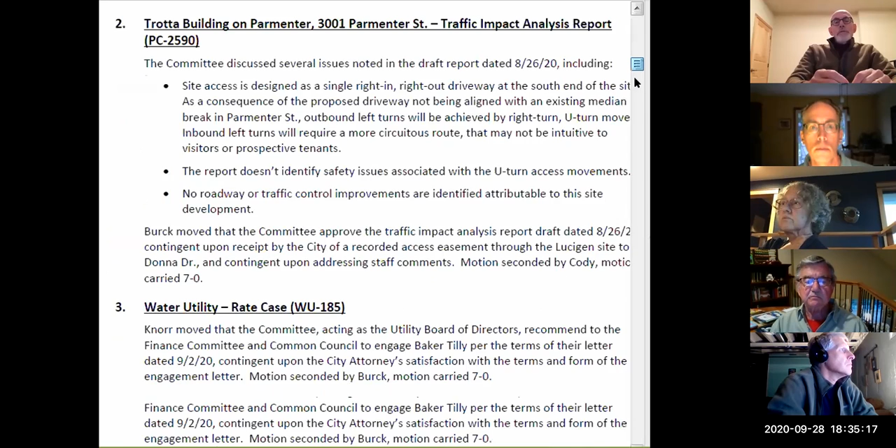Did you want to go to the memo? It might not be a bad idea to look at those options if the committee wants to do that. Another reason that was mentioned was the fact that he's going to have heavy traffic on that road, and if we did it as originally scheduled, it would be damaged, and he threatened not to pay for the damage. Oh, I think that's a fair point. Yeah, I remember that. And that's going to be stronger than all of his other concerns, and that's going to be done in spring, regardless of whether we defer the project another year or not.

My first thought is this comes- oh, go ahead, Don. Do we have confirmation from T-Wall on that? We have heard that, and I think the contractor's also on the line. Trevor Caulfield and Keith are both on the line involved in that project, but the last I heard was that it should be finishing up in spring.

Sean, this is Keith from Stevens. Can you hear me? Yep. Yeah, that is correct. We'll be done sometime in May with Phase 3 of Middleton Center. All right, yeah, it will be complete in May.

That is correct. Ready for people to move in. Correct, okay.

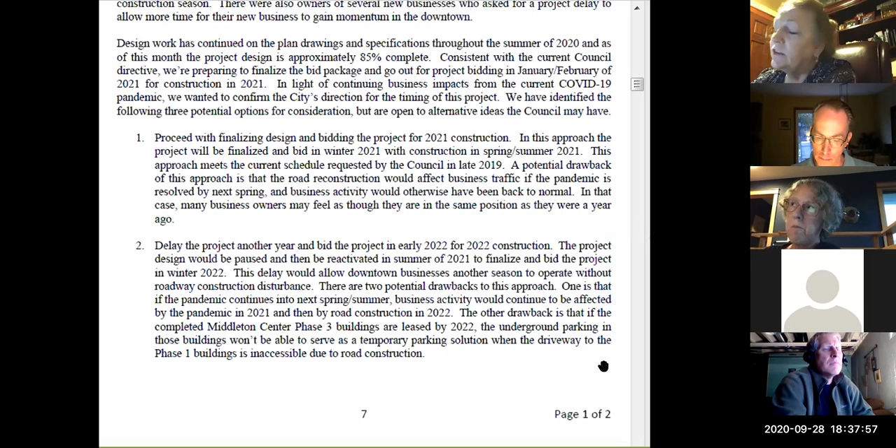Sean and Bob, this is Kathy Olson. I reached out to the Downtown Middleton Business Association and they polled their membership. I talked to the president, Andrew Van Ness, this afternoon. And if possible, they would like to see option number 3. Just plan on going forward with it for next year, but it would be nice to have that little extra check-in. They are in favor of having it completed next year if you could do it earlier in the springtime too.

Okay, good to know, thanks. That little extra check-in wouldn't be the worst thing for them, because I said something about checking back in December or early January just to see where the pandemic is.

As I read it, we don't have to make the decision today. It looks like it could be deferred till December. So what is the harm in just waiting to make the decision, choosing option 3?

Option 3 is essentially a springboard from option 1. Option 1 is let's finish the design and get the thing bid and then build it. Option 3 is almost the same thing, but before putting it out for bid, let's check back in.

Does it disrupt things much, Sean, if you wait a couple months before you've got the final plans, final process in place to do the bidding?

I think we would be wise to actually get ourselves ready to bid it, so that we would want to start back up now and get it ready to go, so that when a decision is made, we can actually get it out to bid.

Sean, as the non-engineer on this committee, but a microbiologist, I would recommend option 3, and even with that, a lot more flexibility. I think it's very optimistic to think that the pandemic will be over even next fall, probably.

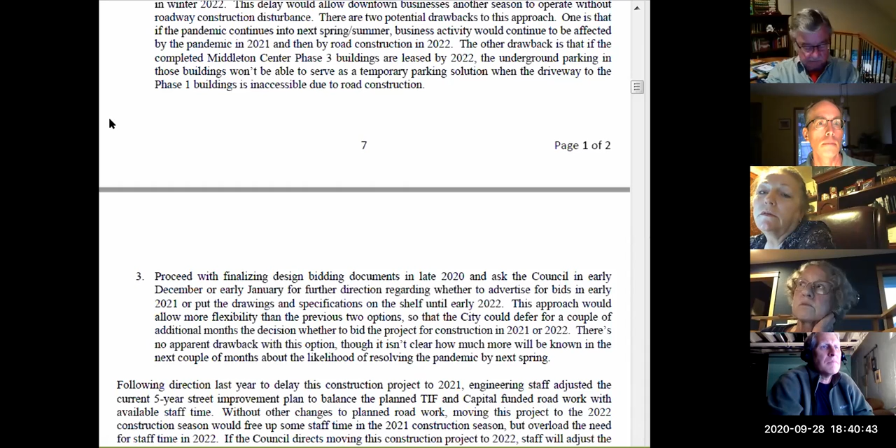I just want to make it clear, wishful thinking that the pandemic's going to be over soon is probably wishful thinking. This is Kathy. They said in 2022, if the pandemic's over, they don't want to have everything torn up. They'd like to get rolling and not have another disruption.

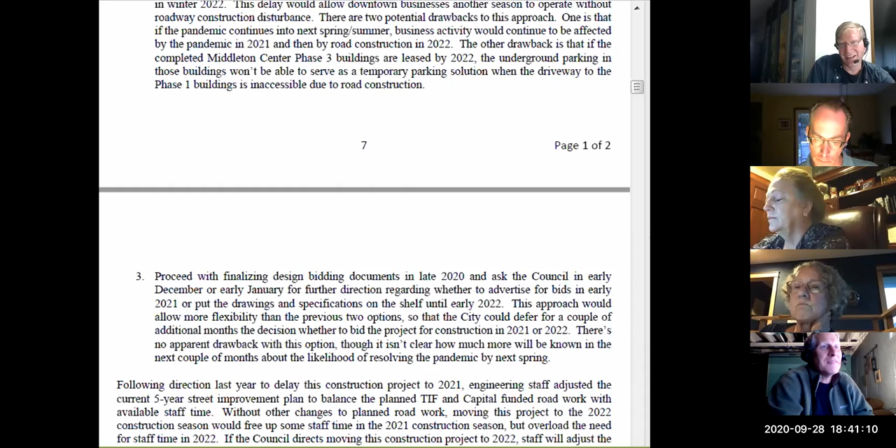So it sounds like we have some type of motion here, which it sounds like everybody likes 1 or 3, and 3 is the same as 1, only with a little bit of leeway.

Added leeway. Yes. So I would make the motion to propose that we approve proposal number 3.

Okay. I'll second that. Who seconded it, Dan? Dan, yes. We have a motion and a second then.

Is there any further discussion on this issue? I just had one question.

Has the pandemic, do we foresee that there'll be a surge of construction demand, or is there a shortage of manpower or anything like that that might affect this when we try to go forward with it? Or is stuff kind of rolling along?

I don't know enough about how that may affect us coming out of winter, because it depends a lot how winter ends up shaping up illness-wise.

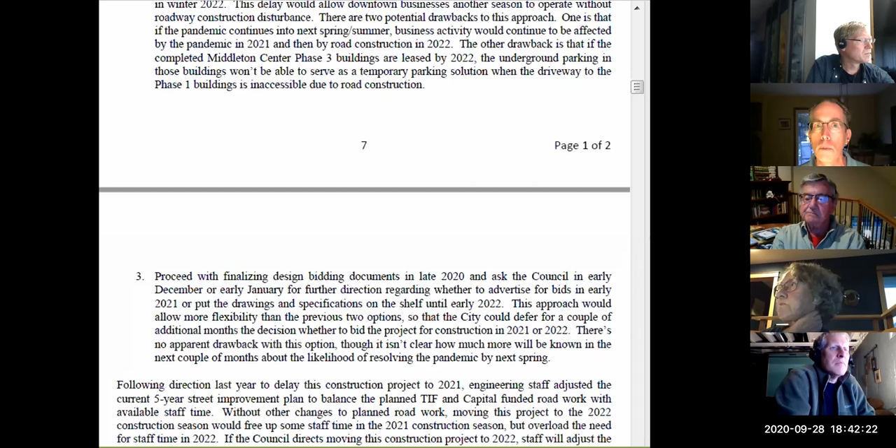I can say this year, when almost everything was shut down, the road contractors were looking for early work. They wanted to get back at it. And we got a lot done early this year.

Further discussion or questions?

Hearing none, all those in favor of the motion signify by saying aye. Aye. Opposed, nay. The ayes have it, and the motion is carried.

And then this, Sean, is what will be recommended to the council. Before we get off this subject, can we ask Tom if he has any issues with getting this done this fall?

Sure thing, Don. Tom Stetzer here from Strand Associates, the project manager on the project, and no issues from my end. I think we were ramping up design here this fall, and we're at about the 85% level, I would say, plus or minus.

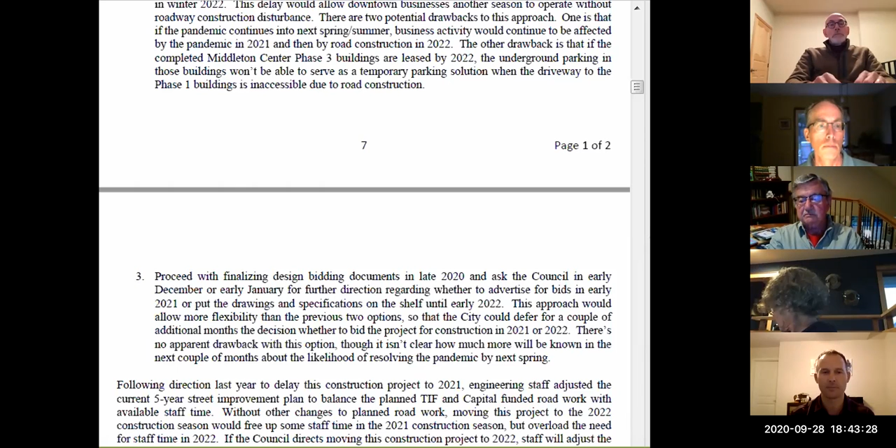We just wanted a little bit of clarity on whether we should keep charging ahead and get this thing buttoned up and ready for bidding, or if the committee and council felt strongly that it needed to be delayed for a specific reason. Then from an efficiency standpoint, we were just going to shut down the project and close our internal project numbers, for example. But no, this plan sounds great to me. Okay.

Next item. Well, that sounds good. Thanks, Tom, and Sean Elzard, if you're still with us, have a good night. Thank you, gentlemen.

So next on our agenda is Middleton Center Phase 3, request to abandon some steel piles in the right-of-way. We had a lot in our packets in terms of design drawings and actual survey follow-up. Let me just zoom that down a little bit.

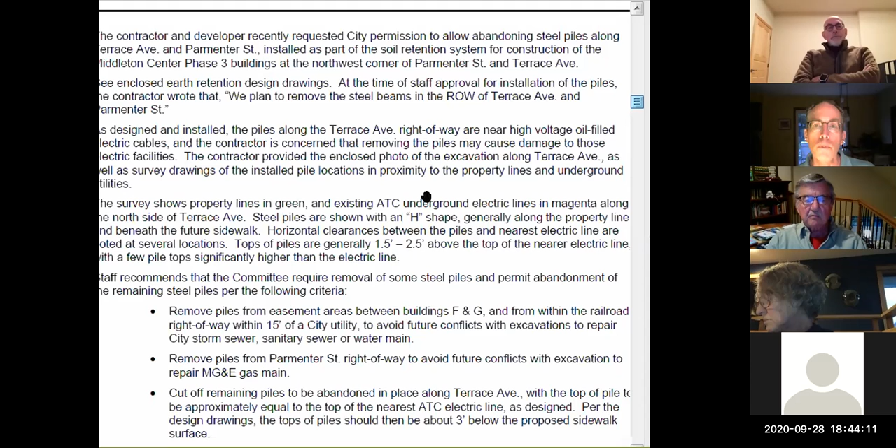The earth retention at Middleton Center Phase 3 was designed, at least along the road rights of way, as soldier piles. So these H-shaped piles were driven vertically into the ground, and then boards are put between them, if that makes sense to everybody. They were installed relatively near the property lines.

Unfortunately, that's also fairly near where there's a significant ATC underground transmission line. I think those are 69 kilovolt lines that are oil-filled pipes, essentially, that carry that electricity along Terrace Avenue. And then along Parmenter Street, there's a gas main.

And so the request was to just allow those piles, the steel vertical piles, to be abandoned in place. I think especially near the 69 kV line, I'm sympathetic to a change in plans. Ordinarily, we wouldn't allow such things to be abandoned in place. And here I think there's the potential to cause more damage from a small mistake than there is to just leave it where it is and put a sidewalk on top of it and let it be.

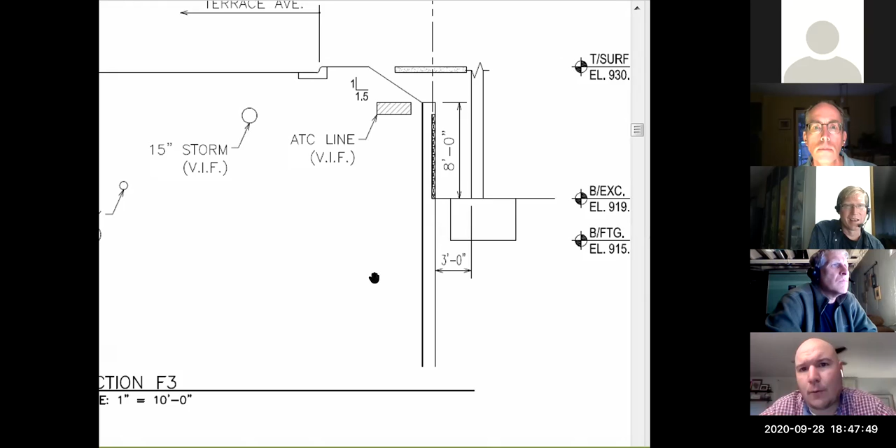Sean, this is Robert. Can we look at some of the drawings? Because I looked at them and I wasn't sure I was understanding which. I was actually surprised that they ever take these things out. But when you explain how they get in the way of other underground items, I'm hesitant to allow these things to stay in place in every location. I do want to help, and I do want to understand it better so that I can make a good decision.

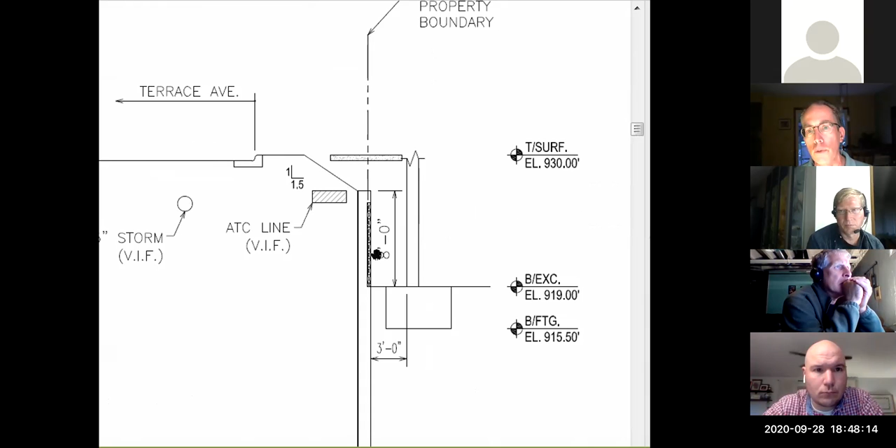Sure, so I'm going to start with a cross-section drawing. If we take a knife and cut a line through the earth and take a look at it sideways - so when you look at a piece of road, curb and gutter, slope - this is the steel pile that's driven vertically down into the earth. It supports this road from falling into the hole that's being dug for the foundation. So they're pouring a foundation and a wall for the underground parking, and up here is a sidewalk.

Again, when we're looking at it sideways, the ATC lines really are roughly here below the sidewalk edge towards the street side. And then we've got these steel piles driven every 15 feet or so, more or less along the property line.

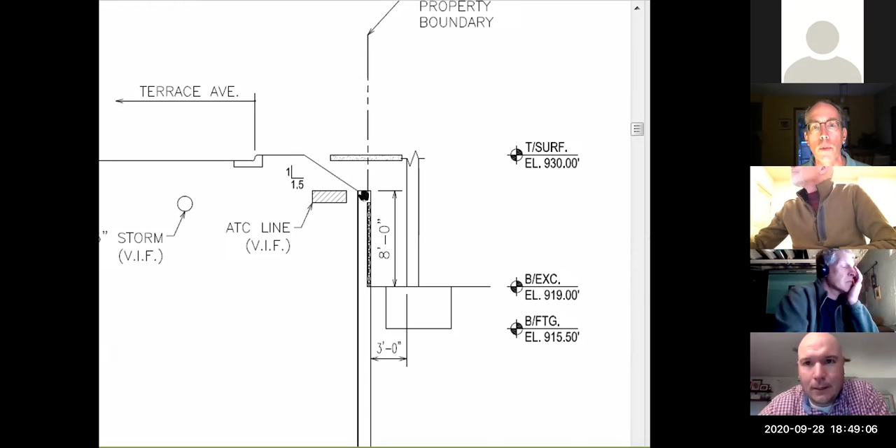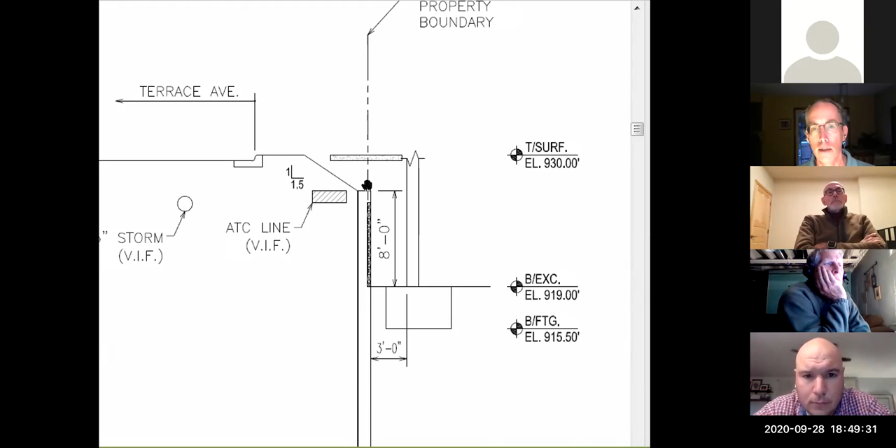So the question is, trying to get these steel piles pulled back out of the earth without wrecking this ATC line is a challenge, I'll say it that way. And so the proposal was, could we just leave these things here? Some of them are a little bit further up than they're shown in this design drawing relative to the ATC line. But even if they were cut off here, they'd be about 3 feet below the sidewalk, if that makes sense.

Sean, could I jump in for a minute or two here? This is a good time.

Typically in other municipalities, they'll allow us to leave these in place. With the proximity of the ATC lines and the gas lines, it's not ideal to even attempt to pull these out. These piles are 40 feet in length, and if we had to pull them out, it's going to create some settlements around adjacent underground utilities, with potential to create significant issues with the ATC lines and the gas line. So what we'd be proposing is to cut these things off below grade, between 3 and 4 feet below grade, and leave them in place. It's typical for what Madison or Milwaukee would allow us to do.

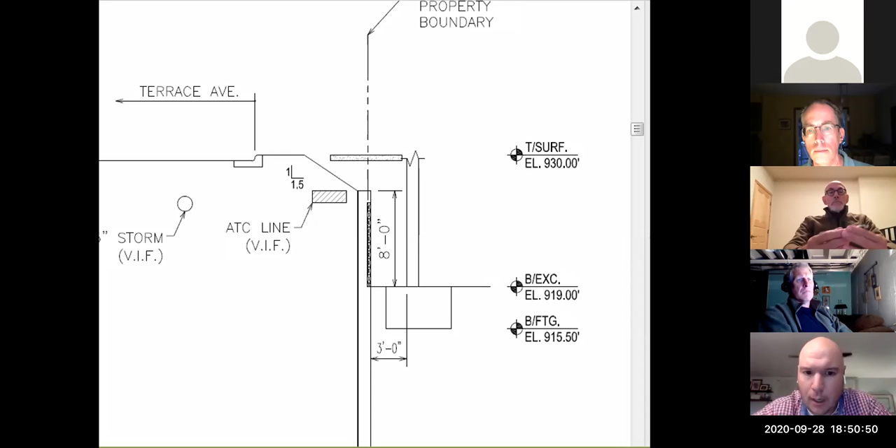I've had some experiences pulling smaller piles out, and it's created some settlement issues that would raise some concerns. This is a perfect picture to look at this cross section. You can imagine we're holding back the earth between the piling and the street. If we try to pull that out, the material between the back of the curb and the piling's got to go somewhere, and it's going to collapse. It's going to move, and it could create issues that would not be ideal. So our lobby is whether we're able to cut these things off and leave them in place.

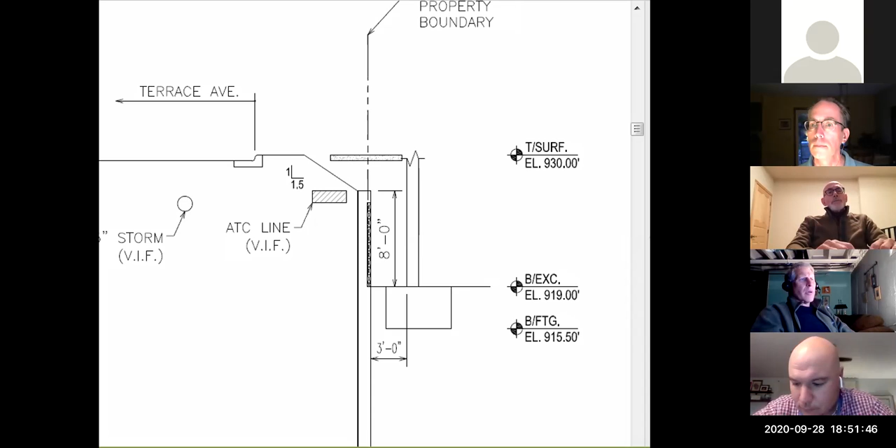Can I ask you a question, Keith? I thought I read somewhere in the paperwork that the original agreement when you put them in was that they were going to be taken out. So how did that take place? Does anybody recall where that text was? It might have been in a summary. Let me look for that. I think it was an email.

I don't know, this is Trevor. Okay, can you guys hear me? This is Trevor Poffeld from Terra.

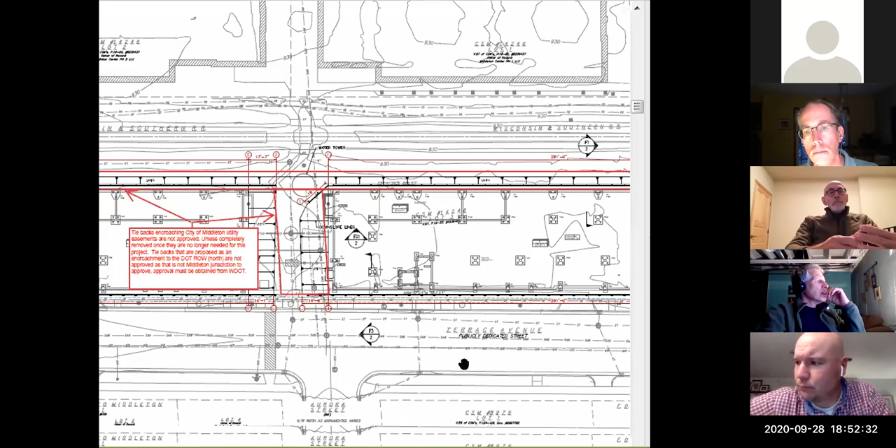I kind of got brought in midway through this project as we were installing the earth retention. My understanding is that the issue was the ATC line was not installed where it was shown per plan. It's actually closer to the job site, to our earth retention wall, than shown on drawings. It was supposed to be closer towards the roadside, and it's actually more towards the building side. So the issue is, that ATC line is over, probably about 18 inches or so, Keith, I can't remember the exact number, closer to our wall, which made it, in some areas, less than 12 inches away from our proposed earth retention. That's the real issue, this ATC line ended up being a lot closer to the proposed property line than originally anticipated during the original design.

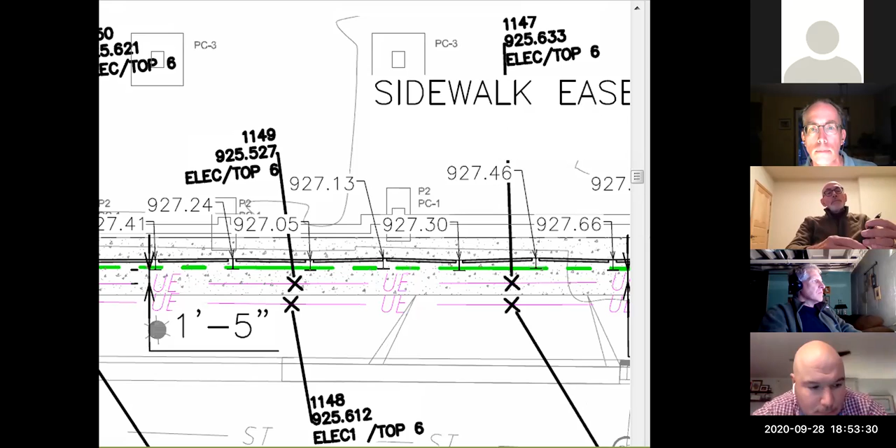Can I ask how you remove the timbers without having a settlement problem? So the timbers stay in place. That's standard, it's just standard oak boards. Those rot over time. The issue isn't the lagging getting removed, the issue is the beams themselves.

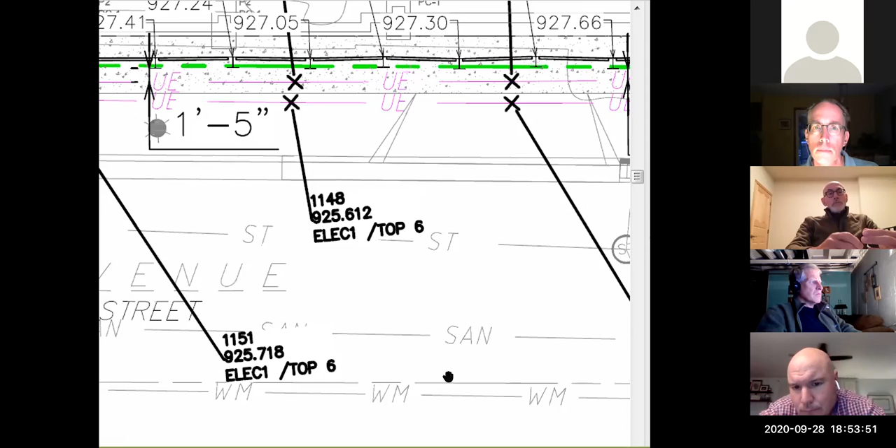If you picture a 14-inch beam, as you're pulling it out of the ground, you're essentially creating a void, a space where that beam was. As you vibrate that beam, you're consolidating or compacting that material to fill that void. That's where you get the pretty high risk in this instance of settlement of that ATC line and gas line in that area. Oh, I know how that's done. I was just curious, you're not removing the timbers then, is that correct?

The timbers would be removed within that top 3 to 4 feet, where the soldier piles would be left in place. Otherwise, they get left in place. That's pretty standard, industry standard for this.

Oh, okay, I had not been told that either. And I see I didn't include in the packets the actual email from Terra Construction that this would all be removed. I think I just included a note about that email in my memo.

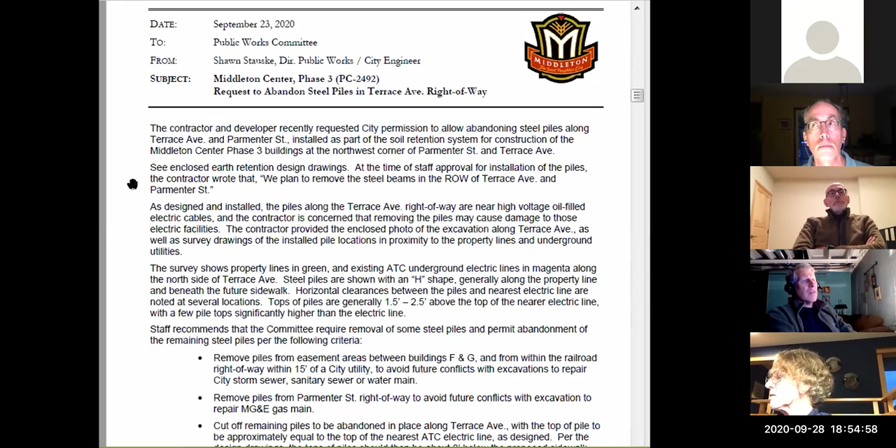I need to explain how you could promise it and then retract from that. I understand if something changed location, that might make sense for some of the piles. I think the impetus for all this is the ATC line runs parallel for the full length of the project for buildings F and G, and it's closer to than anticipated, from when it was originally thought it was going to be.

Yeah, and I guess just another highlight point - Trevor and I kind of came in after the original agreement, after T-Wall got the original approval. I guess we weren't necessarily really that involved with the earlier approval.

And the only other thing to bring up on Terra's end, the equipment used to install the beams is a state-of-the-art high frequency, low amplitude vibratory hammer to negate or minimize vibrations into the ground or adjacent properties, or disturbance of neighbors.

And from previous phases out there, we had used another hammer that I've heard neighbors had complained about the noise and vibrations from. I don't believe we've had that with this phase, but the issue is that in order to use that high-tech equipment, you need to be right up on that beam within the excavation.

The fact is, we literally can't reach the beams from the road with this equipment. We'd have to go back to using the more lower frequency, higher amplitude vibratory hammer, which may be a little bit of annoyance to neighbors or adjacent property owners.

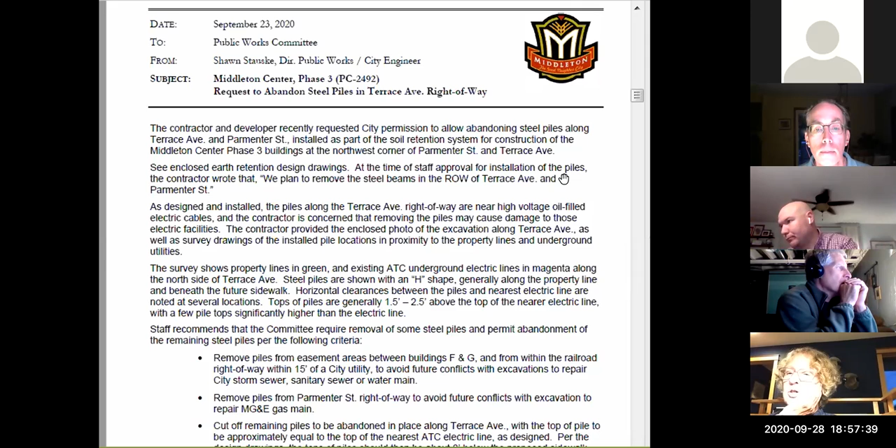Shawn, did we have this problem on phase one? I believe that was - they all put the piles and timbers in. I think that was all removed.

What does ATC say? Anything? I haven't heard from them. Did Trevor or Keith, you contact ATC?

Yeah, we've been dealing with them all along. We had their watchdog out there basically full time while we were putting these in. Brian Schilling is the contact over there. I'm sure I can loop him and Shawn in, unless you know Brian - I can start a conversation with him if needed.

I don't. I just know that I had asked for a survey and a memo, and I got a really good survey.

And what about MG&E? Have we talked to them? Do they have an opinion? I have not heard from them. I was expecting that if we were pulling this steel away from their gas line, that's a longer, more robust facility that they can hold a little bit at a time if they need to. So I haven't heard from them, no.

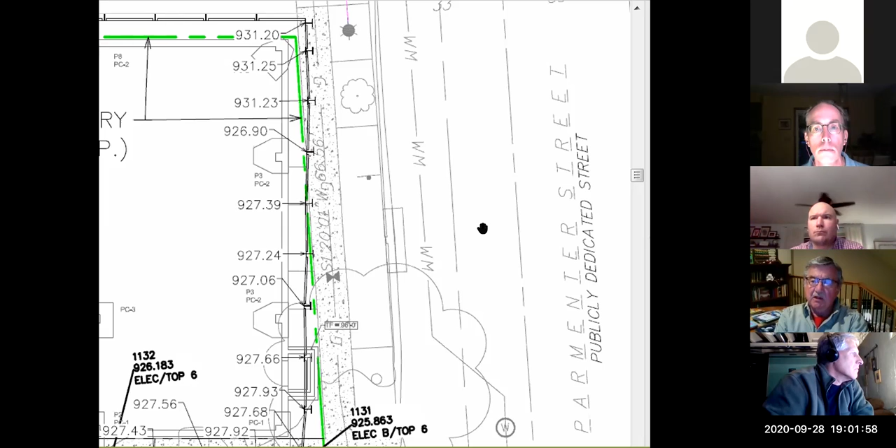Shawn, the sentence from the email you had on screen a short time ago that in effect promised to pull these out when they were finished - was that from T-Wall? No, that was from Terra, the subcontractor that does the earth retention. So Terra's not asking to leave them in place - it's T-Wall that's asking to leave them in place. Well, it's really a combination of all parties: Terra, Stevens, and T-Wall.

So, this is Robert - help me understand. It sounds like they're planning, even if they leave some or all of these in place, to go down about 4 feet to cut them off and remove the boards down to the wood oak boards at that 4 foot depth. Anything below 4 feet is where the piling and the oak would be.

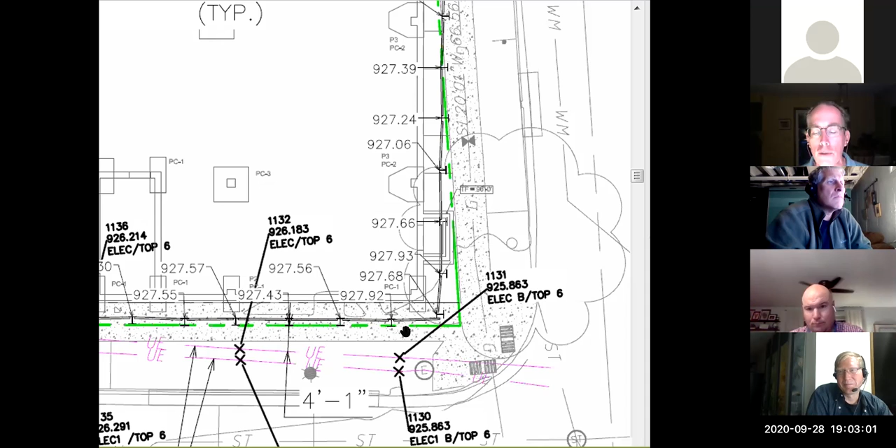So for people running fiber optic cable, for people dealing with gas utilities, how deep do they go? Well, that varies. I think most of those - telephone, gas and electric - are generally in the upper 3 feet-ish, I'd say. When we get into water and sewer, that's when we're 6, 7 feet down, sometimes deeper.

So it seems more likely that when we have to bring in a new sewer service along from the road through this wall and into the building, it has to go through the oak boards, down to as deep as that sewer is going to be - ideally without hitting any steel.

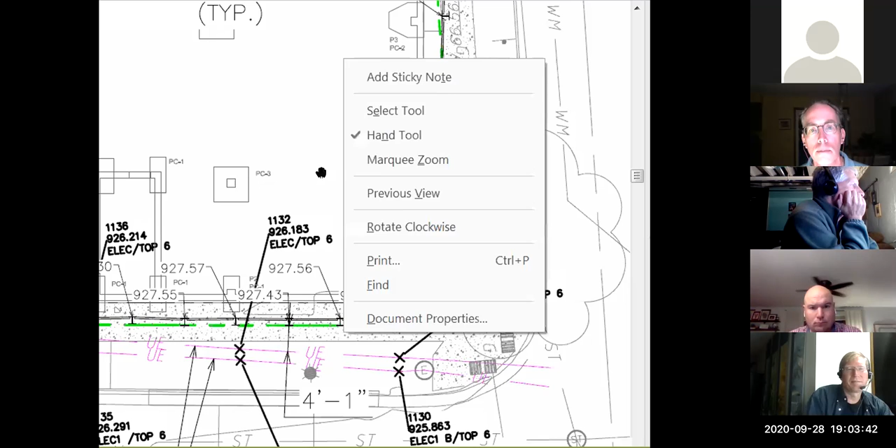And just to jump in again - it is industry standard in local municipalities that this material does get left in place, and generally the top 4 feet gets removed. We do this all over the state - in Minnesota, in Illinois. We're not asking for anything that's not common. Just for reference, we can look up other projects in other construction municipalities where we've done that.

That helps you. The oak boards are easily drilled through by contractors. The steel beams are easily cut off if they're exposed and need to be removed. So just to give a little frame of reference, it's not uncommon that these are left in place - actually more common, just because it's such a difficulty to come back and remove everything without settling stuff around you once everything's built around it.

And I think that's a fair point - thanks for adding that, Trevor, that it's not insurmountable. If somebody has to go through this wall or through this steel, it can be done. They might not be set up to do it at the time they want to bring something in, so they may just have to spend some time getting a torch to cut off the steel they didn't bring with them because they didn't know what was there.

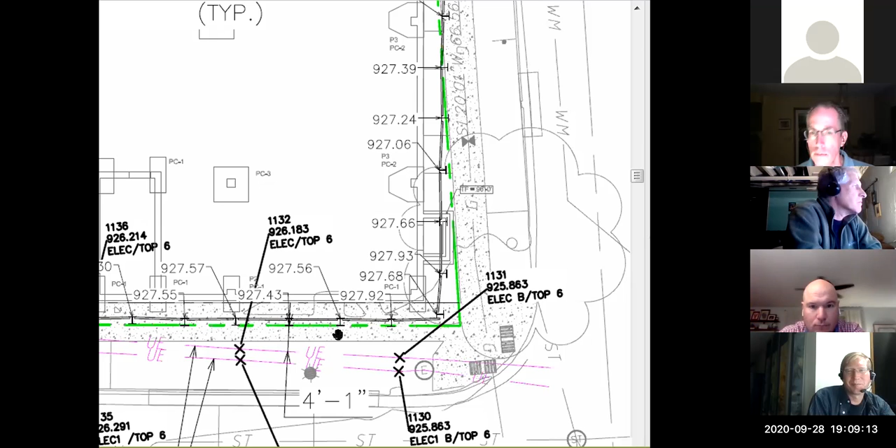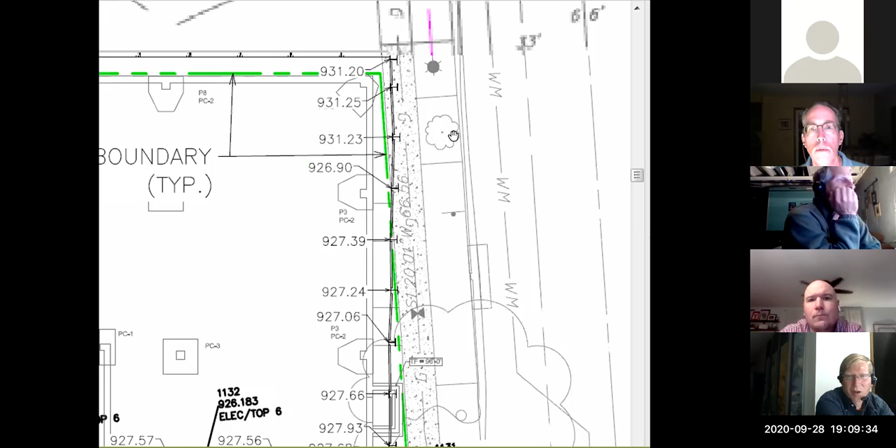So how many are there along Parmenter? Because I feel like this is what we were told as a city that would happen. So this green line is the property line. So all of these little I-beam shaped things are pretty much on private property, and then they start getting out into the right of way. So we only care about the ones in the public right of way.

Because we're no longer liable once it's onto private property, that's not our concern. As you look at that drawing, I just want to point out how close they are encroaching upon that gas line that's there. And again, it's not the same type of equipment, unfortunately, pulling them out that it was putting them in.

So it's a good conversation for you to have with the gas company. I don't know if they can hold or relocate or what they have to do to stabilize that. In the big picture, while you're used to putting these things in and leaving them there, we were told you were going to put them in and take them back out.

Yeah, I can't comment on that, Sean. I wasn't involved. I'd have to get Scott Zimmerman involved, and I'm sure he'd be more than happy to look into that and what the context of that statement was originally as well.

I would also be interested in hearing how your discussion goes on Wednesday, was it? Because right now I'm not all that persuaded to leave in the ones on Parmenter that are in the right of way. Maybe I can be swayed with more information, but based on the information I have now, I would rather get those 6 removed.

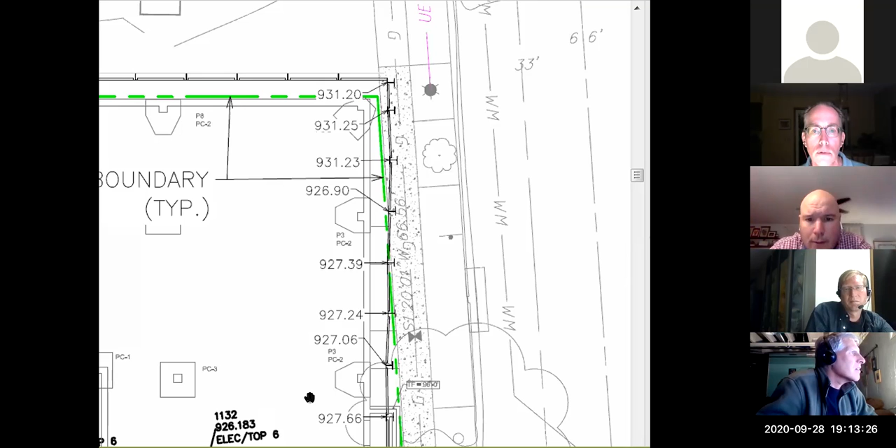I think the green line is the property line. Yeah. That's what we're hearing, right? Oh, so there's some that are, a lot of those are on the edge. Right on the edge. Yeah, they're right on the edge. They're all right on the edge. So some of them just straddle, but it's not a huge thing.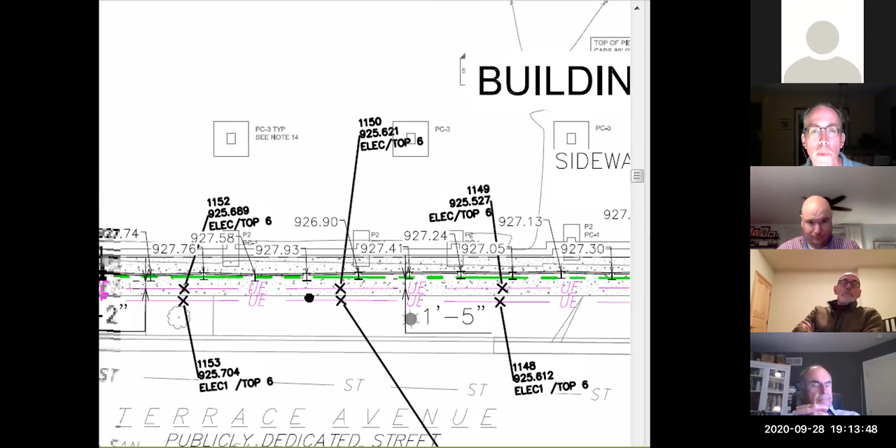I mean, it would be enough that if we could map these and tie it to our record drawings someplace, that we could at least advise a future utility company: don't bother trying to hug the right-of-way line if you're installing something here. Get out into the right-of-way someplace instead, or go on the south terrace, not the north one.

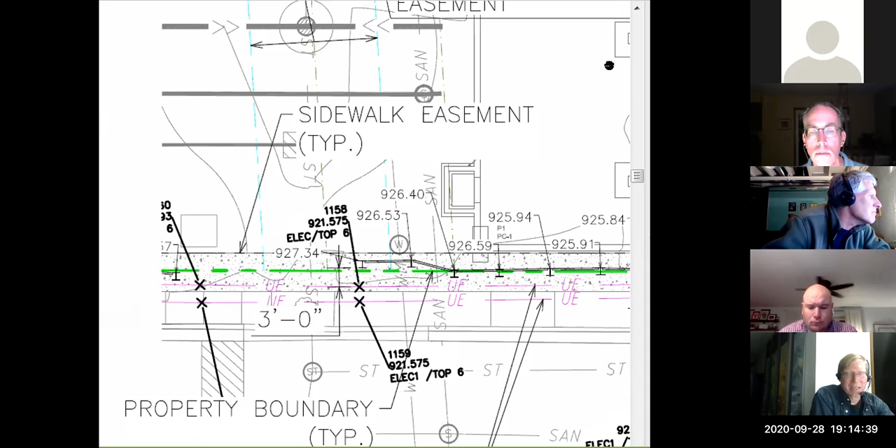I think we're in agreement for the most part. I hear a lot of agreement on what we do on Terrace. I'm just still struggling a little bit with the ones, and I thank you for pointing out that it's not sewer work that's probably going to run into these things. It would be potentially something more like fiber optic, which may be above where they're cut off anyway. If fiber optic is 3 feet down and they cut these things off at 4 feet, maybe this isn't a big issue. But I just feel like I need a little bit more information before we just agree to this.

Sean, what about the issue that you raised with the situation between buildings F and G? Regarding sewer and water? That's almost where I ended up landing here anyway - we've got water and storm sewer and sanitary sewer running between these 2 buildings. So all I'm asking is within those easement areas, within 10 feet of where those pipes are centered, to get those piles out. Because when we dig, we have to dig deep and on really short notice.

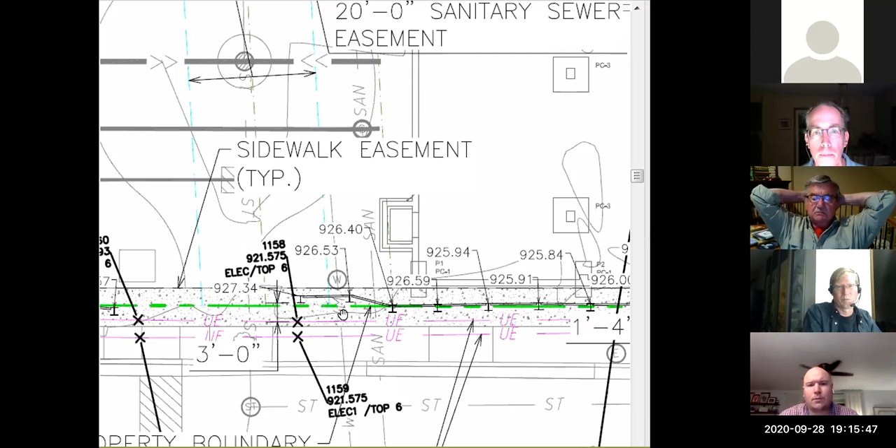Well, and Sean, the other issue right there is that sanitary is probably 40 or 50 years old. Yeah, I think it's clay, correct? We've already had some recent issues with it. I'd be concerned with that specific area as well, pulling those out and creating further issues with that sanitary. And it might already be compromised. And if it has to get rebuilt, now's the better time to do that. When we have a problem, I cannot have a crew and a backhoe looking around for a torch. I can't do that.

How deep is that? Do you know how deep that sanitary is? Not offhand, no.

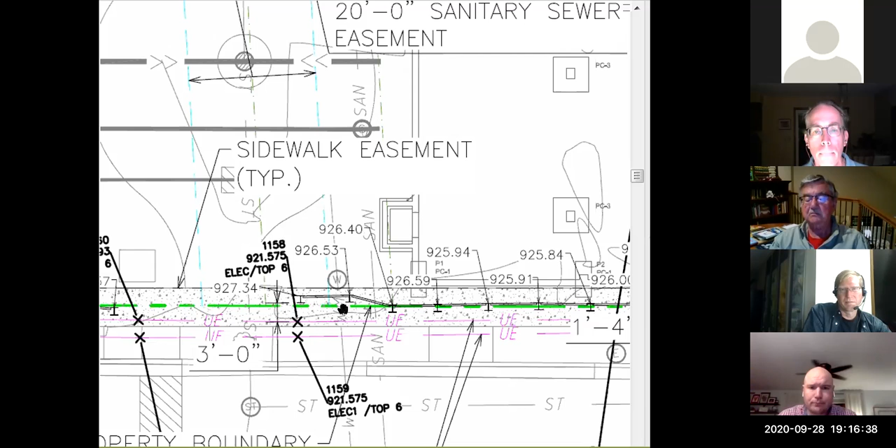So really it's a couple piles on one side and a few on the other. Maybe 4 over here-ish, and then up along the tracks there's a couple more.

I'm getting concerned that we simply need a whole lot more information from multiple different sources before we can make a decision tonight. Not being an engineer, I'm not sure, but I would love to know what MG&E thinks about this whole thing. And MG&E is one input, right? And there's some others too - future utilities may have some concerns, and again, it is city right of way. ATC, I feel like we need more information.

Is there any urgent time element in terms of getting these pilings out or cut off, is there? At this point?

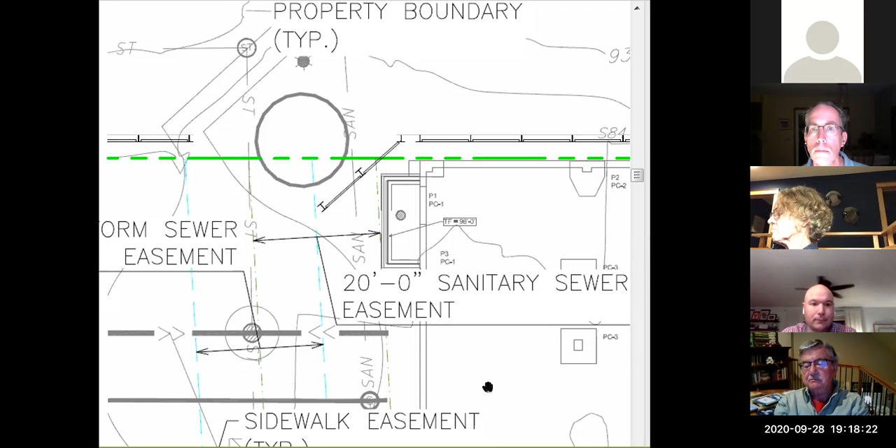We need to backfill along Terrace Avenue. We need to keep backfilling so we can build the building. We have the foundations in on the one building, and we need to get backfilled

out there as soon as possible. Well, I can appreciate that, but you backfill and that takes care of your problem, but then the future problems that are left with all of this are going to be the city's to resolve.

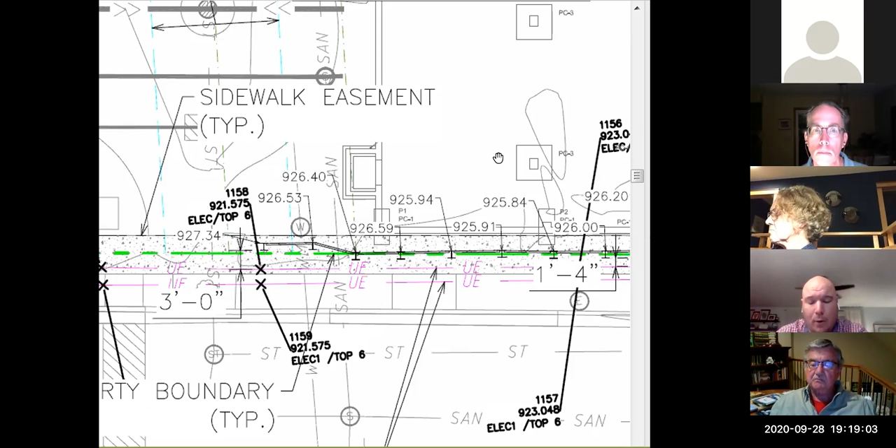Correct. Well, I'm sorry. So the area where we have the piles that are basically from this utility easement down to the corner, I think are all okay. Are we in agreement with that? And then it's really just the Terrace Avenue or the Parmenter Street, and then the ones in the easement that we have to worry about.

Well, I don't know, I thought we wanted to get some more input from ATC to see what they think about this as well, because they have maintenance responsibilities on this stuff also. And

once everything's done and you guys are packed up and gone away, the problems that ensue fall back in the city's lap. Yeah, unless we can put a legal agreement together that assigns the responsibility to the building or the contractor, and then if they want to assign that agreement to the property when the property's sold, they can do that. Personally, I think that's an avenue that we ought to be exploring vigorously.

Yeah, these are going to be there for 100 years or more.

Should we consider, for purposes of keeping construction moving along Terrace Avenue and pushing off to a future agenda reconsideration along Parmenter Street, or at least the northerly ones along Parmenter Street, approving essentially, as had been recommended by me, to allow abandonment at some cutoff elevation for the ones along Terrace Avenue, removal of the ones within the utility easement or zone of influence, and removing the ones along Parmenter Street as the default position, so that in the future, if the committee is convinced to reverse that decision, at least there will be a decision in place in the meantime.

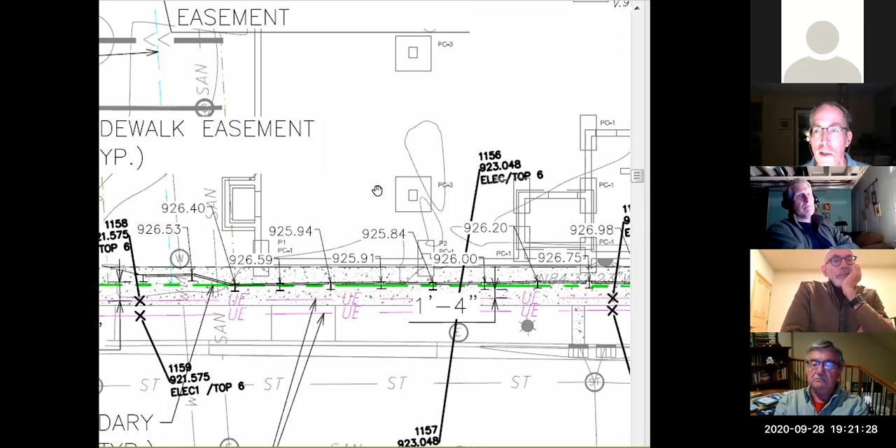Definitely, but one would hope they don't have to dig around all those I-beams to get their trench, but if they're only down 4 or 5 feet, then they're probably okay with what's left. But I agree, on Parmenter Street those should be removed, the ones out in the right of way, because that's the main street in the city essentially, and who knows what's going to go in there in the future in that right of way.

Sean, would you like to add some 2 cents to this discussion? This is Gary. Now is as good a time as any.

One thing you might consider is for any pilings that are allowed to remain, that they be cut off to a deeper level than merely 3 or 4 feet, something between 6 and 8 perhaps. That will keep them well clear of the vast majority of future utility installations. The reason we care about what happens to fiber optic is because if they can't go where they want to, that leaves them moving further out into the right of way, possibly interfering with our facilities.

Just some food for thought. Sure. I had previously picked 10 and that was unsafe, and I don't know if 8 is or 6 is, but it may not be. So OSHA is 48 inches. Yeah, so we wouldn't be able to do anything deeper than that. Okay.

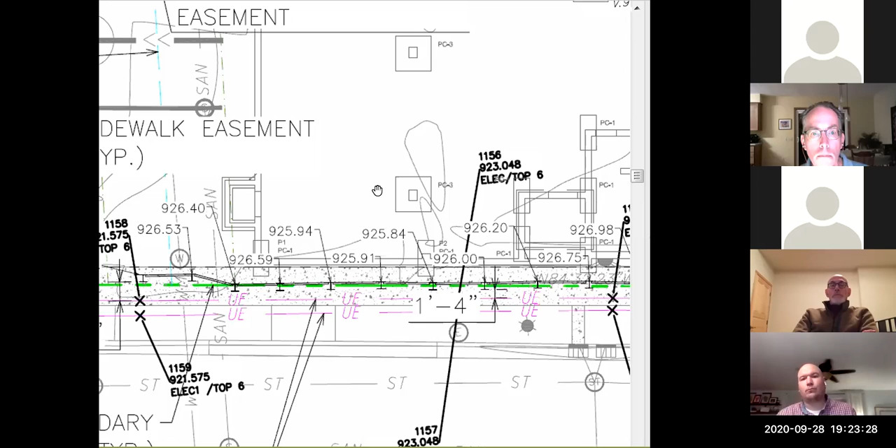Oh, if you want to try to use a trench box or a road plate or anything like that. I think, again, we're talking about Parmenter Street here, though. Oh, Parmenter Street. Yeah, we can't physically put anyone in that hole unless there is some type of design system or trench box, and you have to have room in order to install that. And with that gas line there, I don't know if that's even an option to be able to get the excavation wide enough to install some type of retention.

So to move forward tonight, I would make the proposal that we allow the ones on terrace to remain, except for maybe 1, 2, or 3 that need to be removed near that easement in between the 2 buildings. And then...

We require, as of today, that the 6 or so along Parmenter be pulled out. And if they want to come back at a future meeting with more information from all the parties involved as to the hazards and dangers of pulling them out, we can talk about that at a future date as well.

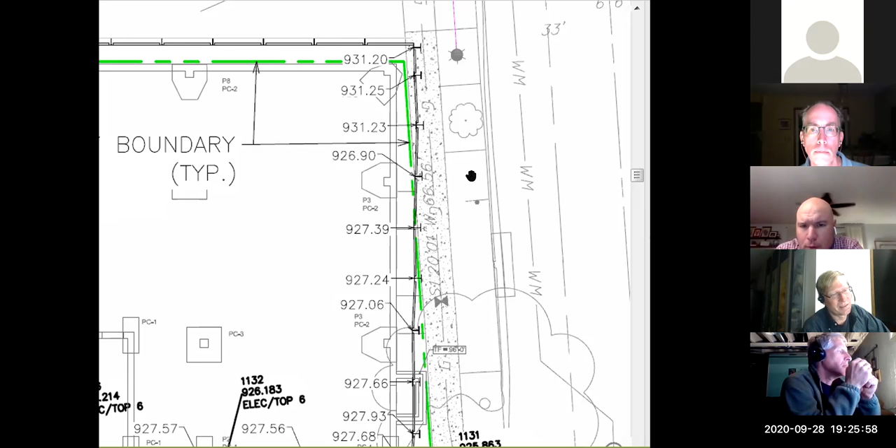This is Trevor from Terra again. Before you make a motion, I'd like to talk to ATC because there's one along Terrace Avenue within the easement that they're asking us to remove. We'd have to get sign off from ATC or someone else before we'd try anything like that, since it's not in a concrete duct like we were led to believe, and it's closer to the beams than we were led to believe before we agreed.

Okay, why don't we do it this way? Why don't we just say: we make a motion to follow the recommendations in Sean's memo, except that we would like ATC to approve the solution on Terrace Avenue.

Well, the downside is you don't want to give ATC veto power over a city decision. Right, so if they want to come back and convince us, like Robert said, I'm open to that, and I think that's the cleanest solution. I understand what Trevor's saying, but we have to make a decision tonight. We can hem and haw over this for the next 2 hours, and I don't think we're going to get any closer to a resolution.

So if we say right now, let's go with the proposal that Sean Stauske recommended, it gives you clear marching orders, Trevor and Keith, but it also gives you a chance to say, well, that's what the city's saying now. Come back to us with more information and we may be willing to change our mind, but as of today, I think we're giving you some pretty clear direction as to where the city stands on this.

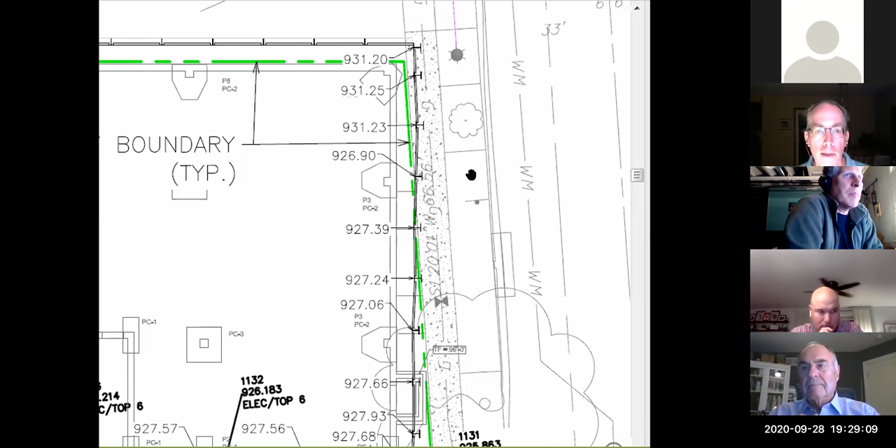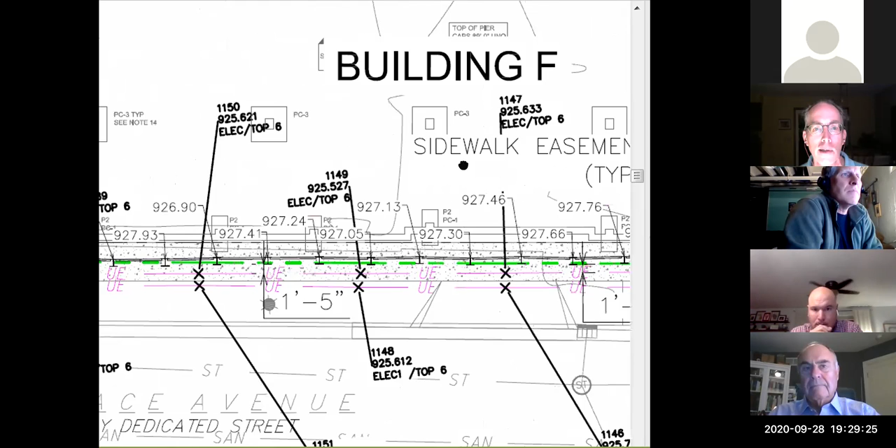Right, and that's all that's being allowed by the committee right now. Things in the easement and along Parmenter go away. Now, if a future proposal is different, that's fine. Are you somewhat comfortable with Terrace Avenue, the pilings that are basically on the border? I am. I think they're close enough to either being on private property or just straddling into the terrace that we can map and track that. And we shouldn't be permitting folks to put stuff within 6 inches of a property line anyway. Who'd want to do that? Apparently we did.

So I'm not as concerned by that, and I think there's a really valid concern with trying to mess with that at this point. Okay.

In that case, I'll second the motion we have on the table, which basically follows the original solution proposed by Sean. We don't wish to explore any further the possibility of them assuming liability for future concerns. I don't think they can tonight. I think they have to remove everything that we're concerned about at this point, unless they come back. So to your point, Bob, that's always on the table, but not really on the table tonight. If they want to propose something else in the future that says we leave them in, but so-and-so group will come back if the city ever needs them to and take care of this, or pay for the cost to deal with it, then we can address that at a future meeting.

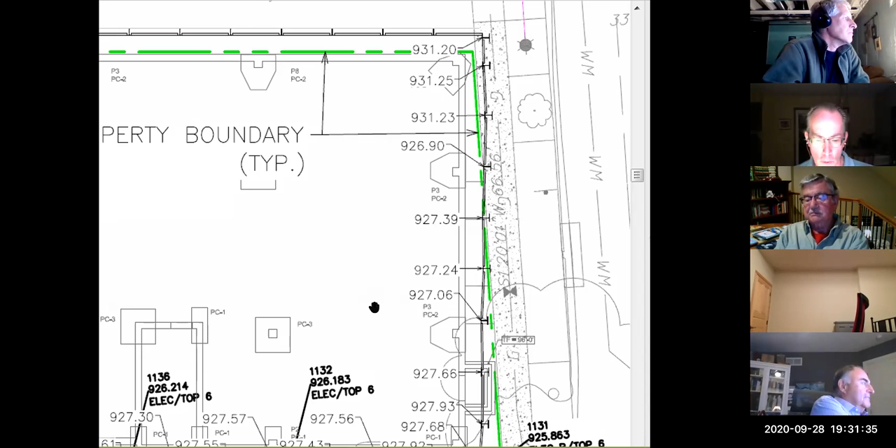Next, we've got up Scooter's Coffee, and I know some folks are with us tonight. The property owner, Jim Bowman's with us. Yep. As is, I thought I saw Adam Laborde. Yep, he's signed in. And Mike Michaelis still with us? Yes, I'm here. Okay.

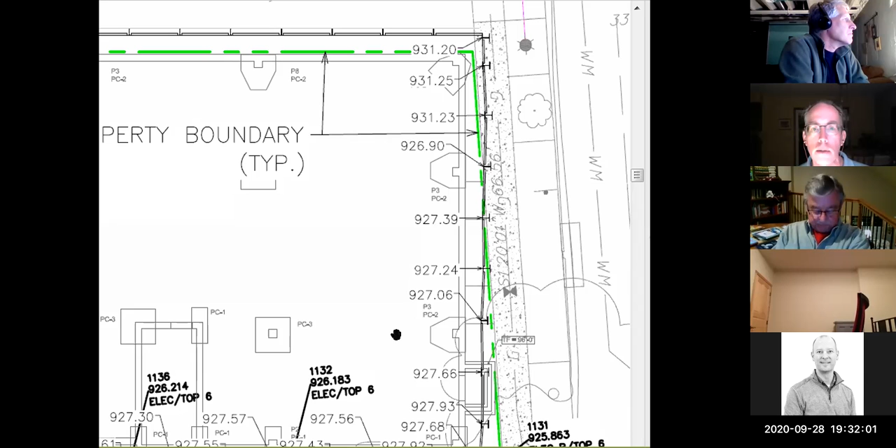To talk about the Scooters Monument sign, which I'm sure most of you will remember, but the scales are kind of wildly different from page to page on this agenda, so hold on to your hats.

The committee had most recently asked me to check in on the right-of-way ownership issue, and I contacted the county, which had jurisdictionally transferred University Avenue to us at the time of its reconstruction a few years ago. What I wasn't expecting was that the county said, no, this was all acquired by the state in 1933 as part of US Highways 12 and 14, so they retained ownership of the right-of-way. So then I contacted the state, and a consultant got back in touch with me shortly before I sent this agenda out, fortunately.

But what she told me, as is typical of the state, is that their records from then are not perfect, and we've run into that before, but what they're willing to do is if the city declares right-of-way to be excess, they're willing to negotiate with the interested abutting property owner for its acquisition, but they'll only sell it without title search or title insurance. They'll sell it essentially via quitclaim. They'll quit their interest in it, but that doesn't mean somebody else isn't interested in it.

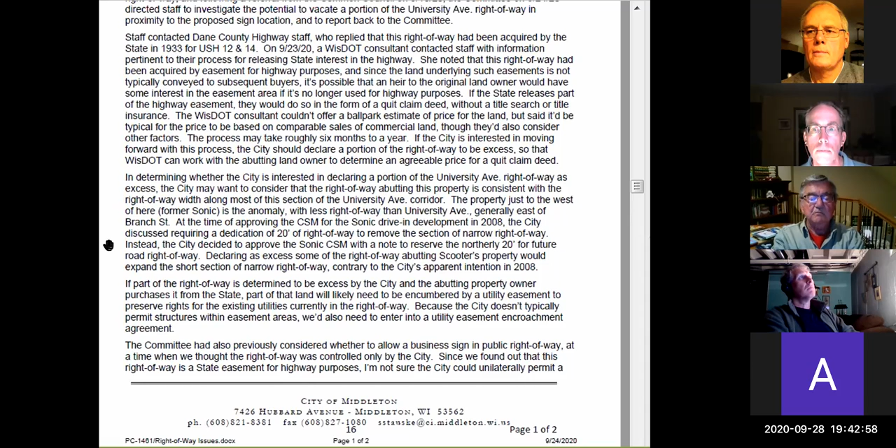Isn't that small strip of land like a discontinuity along the right-of-way? It actually is a thicker right-of-way in the area we're talking about, and then adjacent to it, it's much more narrow.

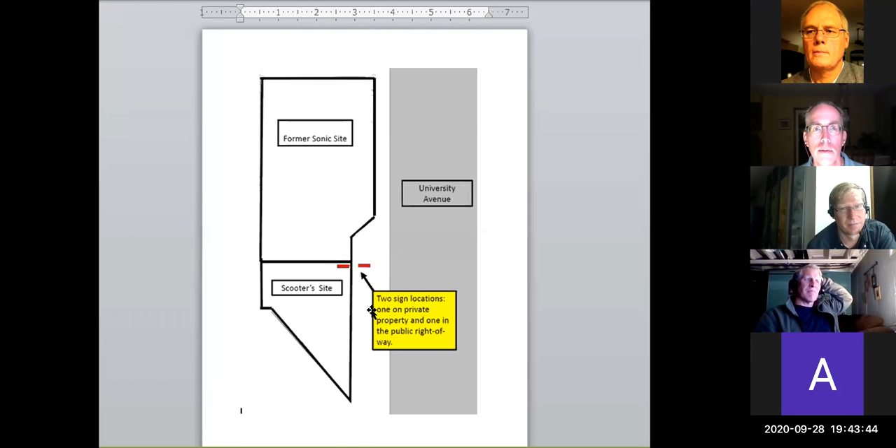Sean, do you have that diagram that I gave you? I do. Let me try to share a different screen here, and bear with me. My computer is not quite as old as me, but it's getting there.

Yes. Yeah. Okay, so this is a sketch that Jim shared with me earlier, just showing a base outline of the 2 sites, the scooter site and the former Sonic site, what will become Napa Auto Parts, we think.

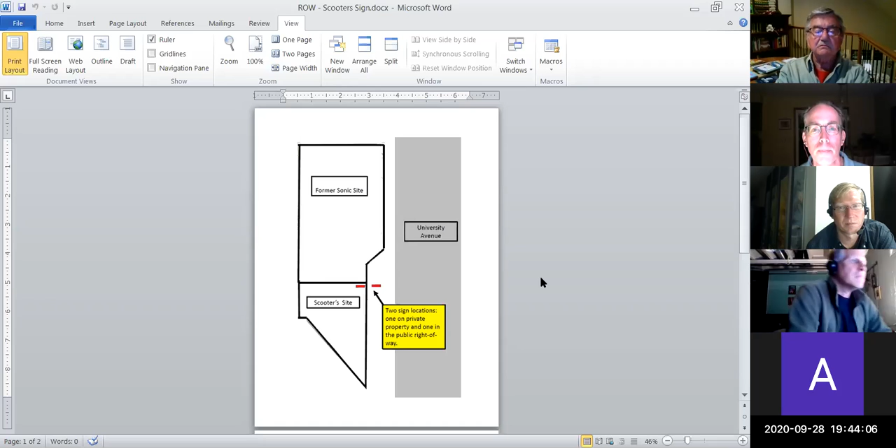So this is a sketch Jim shared with me earlier, showing a base outline of the two sites, the Scooter's site and the former Sonic site, which will become Napa Auto Parts we think, with the proposed sign location that's out in what is currently right-of-way but could really be squared off and pulled over into sort of a box shape. I had at one point created an exhibit drawing to send to the state folks about where we're talking about. You can kind of see this is the old Sonic canopy for their drive-up ordering, and down here on the bottom of the page is where the driveway into Scooter's Coffee is.

I think this little white dot is the existing old Crandall sign probably. But this yellow line is the current right-of-way, and this orangish line would square that up to say, let's take this same width and drag it down and pull it over so we could get a little bit of on-site land next to Scooter's property. I don't think anyone would want to try to create just a little bump of rectangle like that for the right-of-way.

Does that create a condition where we're going to add a little bit of land to Scooter's Coffee and a little bit of land to the future auto parts store? It looks like that yellow line is the property line between the two properties. So is there actually going to be two little things affected there? Most of this would be abutting Napa. So Napa would have a tiny bit, and then a little bit of it would be next to Scooter's. So the whole thing's pretty small, but it does involve both businesses, two properties.

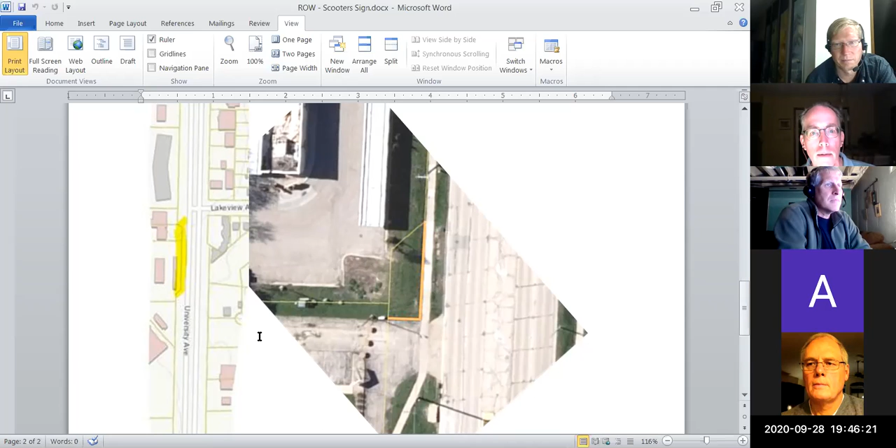So both businesses would need to buy the land. Ideally, yes. That complicates it because there's another party involved. And then this, could I just buy the little piece I need? Well, that would make it a real convoluted map, a hardship for tracking right-of-way later, to have just a little bump next to this other relatively small bump.

Next to this, I have, and I don't know if I can bring it up. Oh, I think it's on your screens probably. Oops, or was. Most of the right-of-way, let me zoom in on this a little. Oops, more. Huh, doesn't seem to want to let me do that.

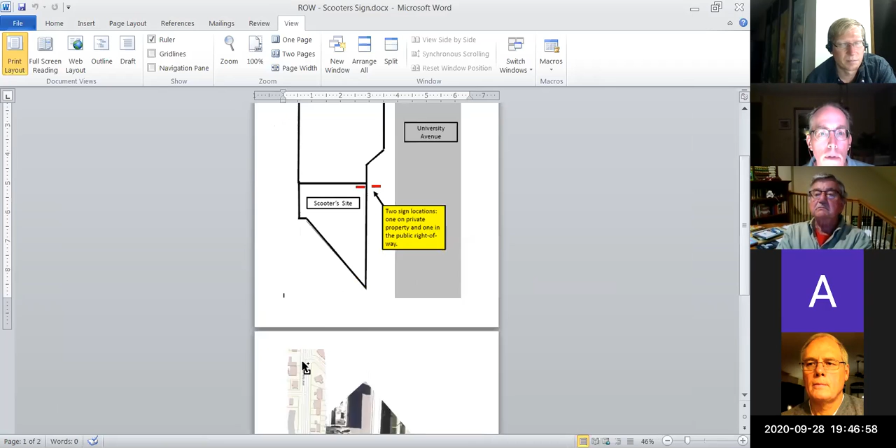While you're looking for that, Sean, am I understanding correctly that the former Sonic site will be losing their bump out when it becomes Napa Auto Parts? No, they will continue to have that bump out. Yeah, you can kind of see that in the highlighting. Exactly. This is just a little bit of a narrowing of University Avenue.

If you look up and down most of the corridor, you see these nice strong straight lines, but this is where it gets narrow, next to the old Sonic and part of Guggen's Advisors. They have two parcels but one development, and sort of the easterly half has narrow right-of-way, more site, and the westerly half has more right-of-way, less site, if you will.

That's why when this was redeveloped into Sonic and they created a certified survey map and moved the city's storm sewer to go around their building, they created this certified survey map, and the city at the time was pursuing a dedication of this as right-of-way. I don't know why, but for whatever reason, the certified survey map was recorded, and presumably as a city policy decision item, we agreed that it would be listed just as 20 feet of future right-of-way.

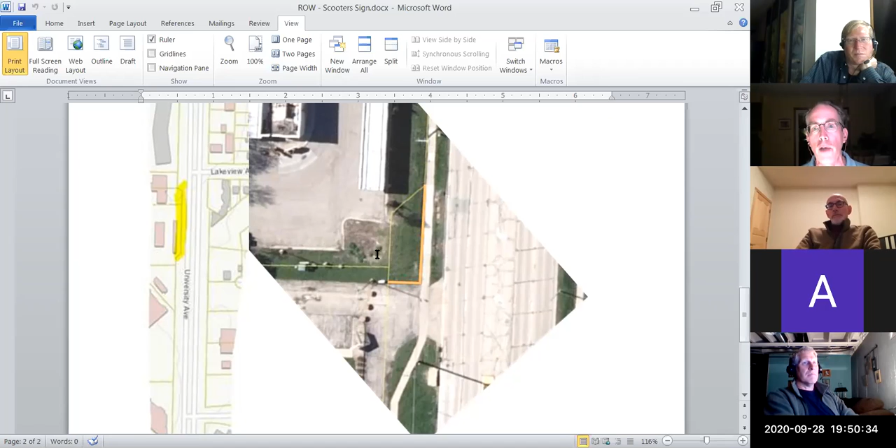Again, Sean, we can't even do that if it's a state right-of-way, can we? We can't alone do that. No, we could support it, and I think the state is amenable to that. But the state would have to be the ones leading the sale to make it private property. I haven't asked, but I doubt the state would permit an encroachment. In fact, when this was reconstructed, the county ordered the removal of several things that were encroachments at the time.

Isn't the state going to be pretty tough on giving up any right-of-way? I don't think so. This hasn't been used as a state road per se for a really long time. And it is still on the national highway system, but that's just a linkage consideration, not a jurisdictional ownership kind of consideration.

It seems like that whole jog is a narrowing of the right-of-way. The majority of it is wider. I thought it was the reverse of that. No, if you look at Dane County's mapping, DCI map is a really good tool. It's pretty clear that east of Branch Street, between Branch and Allen, we have this kind of uniformly wide right-of-way. Every now and then there's a little extra piece of width as you move east. So it does progressively step toward somewhat wider right-of-way than at Branch Street, but it's in the same ballpark of being pretty uniform, except for this bump.

And Sean, I think that's what we've talked about this whole time too, that this location is unique. I've heard you guys mention before that everybody'd want to have their signs closer, put into the right-of-way so they'd be closer to the road. But how many of them are dealing with this bump out that we're dealing with? That's causing this problem, because if that little bump was shaved off and straight, we wouldn't be having this issue, because that would mean the adjacent property would be pushed back as well, and we wouldn't have these line of sight issues. So that's why we're kind of at where we're at, and why we're asking you guys to treat us as a unique situation.

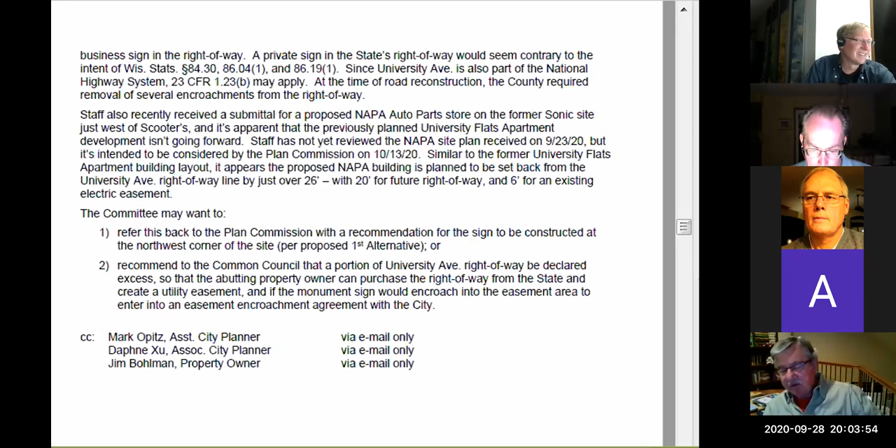We could put off, Bob, if you'd like, the ordinance amendment for the parking restrictions on Donna Drive. I doubt if it'll take long, but I don't think there's anyone here with interest in that agenda item.

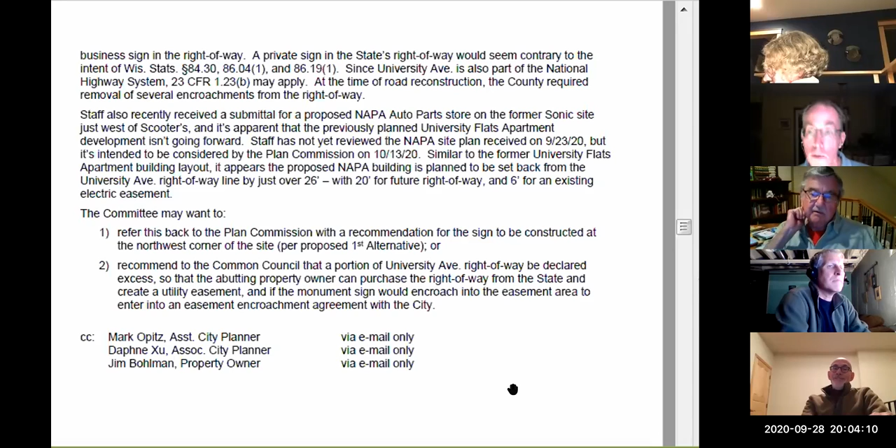Well, I thought you did, Sean. I am. Who is? I am. Oh, Susan, I drive that all the time. It needs to be done. Yeah, I agree that it's not going to take long. We might as well do it. Yes.

Go ahead. So this is really just cleanup. We added a median island on Donna Drive near Spring Grove Court, near where the pedestrian crosswalk is, not far from the curve. And so this parking restriction change would effectively catch up with that, with a slight shift of a bus stop on southbound Donna, where we moved the bus stop location from a driveway apron onto an actual bus stop pad, which is always our preference.

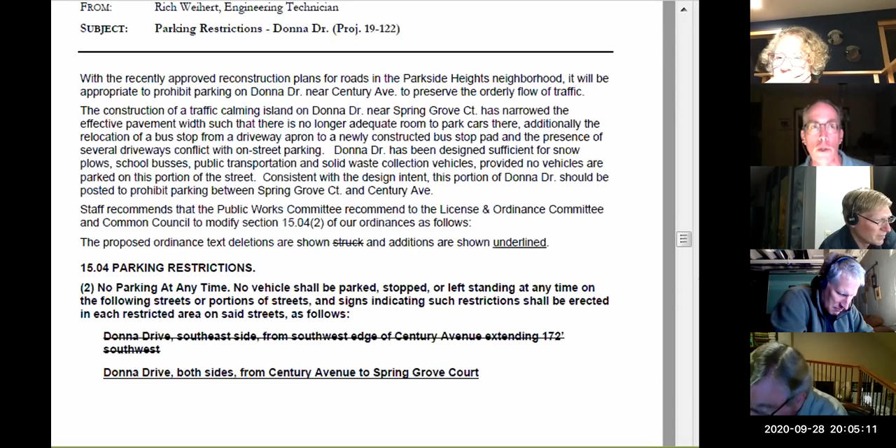And then because on the east side of Donna, we added the median, there was already, as you're effectively eastbound/northbound on Donna Drive, there are 2 lanes. So to form those 2 lanes, we had no parking. Well, this extends that no parking all the way to Spring Grove Court on the east side as well. So it does expand mostly on the west side, but a little bit on the east side, I would say.

I would make a motion that we recommend the proposed ordinance text changes. Is there a second to the motion? Yes, Dan. All right, we have a motion and a second to recommend those ordinance changes. Is there any more discussion of that issue? Hearing none, those in favor of the motion signify by saying aye. Aye, aye. Those opposed, nay. The ayes have it, and we will so recommend to the council.

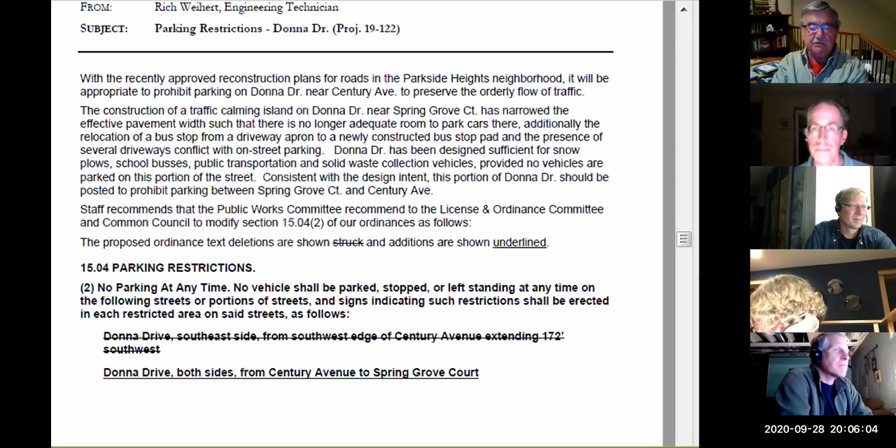All right, then we're up to consideration of multi-way stop control, South Avenue at Middleton Street. And Sean, thank you for looking into this at my request. We can talk about it if anybody has questions, but I think your report walks through in very clear detail why there's really no driving need to change the current two-way stop sign to an all-way stop sign at Middleton and South.

So while I'm the one who kind of pushed Sean to explore this, and I very much appreciate the fact that he did, all indications are that it's not necessary, and there's always the risk of unintended consequences by making a change when you don't need to. So I personally think that the intersection does not currently meet or warrant any type of all-way stop control here.

I have one disagreement with that. I drive that intersection a lot, and every time I drive it, I think about this, because frankly, when you're going south on Middleton and get to South Avenue, you cannot see the traffic from the left. The only way to see it is I end up with the full front of my car out in the middle of the intersection in order to see that traffic coming at you. So I think it's a dangerous situation, frankly.

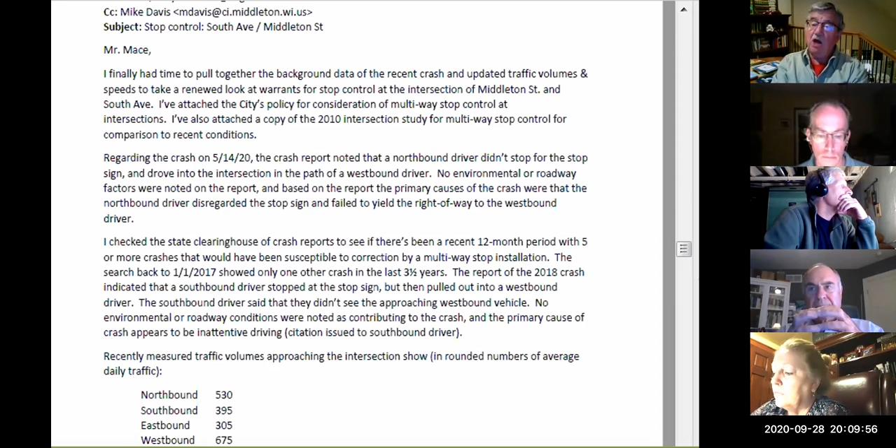I don't disagree with that, Kathy, but I think the visibility actually is better if you're a pedestrian, because I walk it all the time too, and you're a little farther out into the intersection, and you can take a step out, and if there's traffic coming, you can take a step back, which isn't always possible if you're driving. But even given that, I don't know that it warrants it.

I just think it would encourage, that would be a much better suited place for people to cross, and to have it set up so it's safer for people, especially with bikes and walkers, and younger people would be able to traverse from Fox Ridge to downtown and vice versa to get to the parks and to the ponds. I just think it would be a huge improvement. A stop sign there? A four-way stop there.

Because Parmenter is not really a way for bicycles, and with the missing sidewalks and stuff, it's tricky. Then people would otherwise have to go all the way over to Park Street to get to a bike lane. This would be an easy way for people. The road would be okay for biking on there.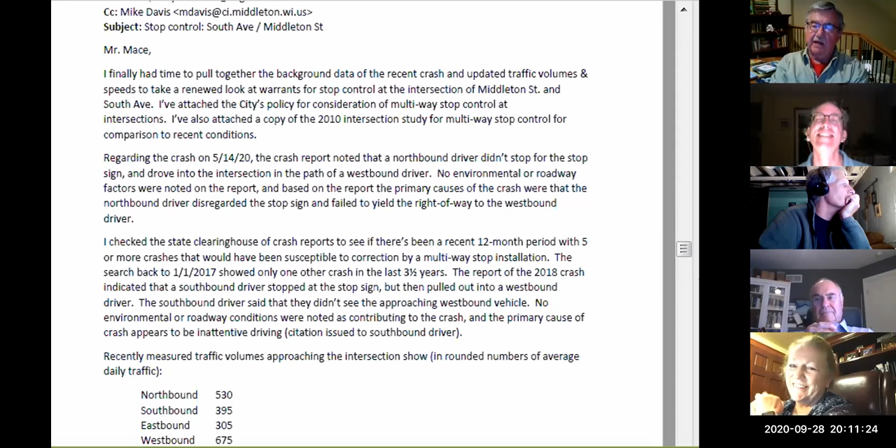Well, you don't have any sidewalks on the east side of Middleton. Correct. You don't have any. Correct. Sidewalks on the north side of South? Yes, the north side of South. I'm directionally challenged, so this is difficult. It's a marked crosswalk.

And I think I have a constituent on here that would like to speak. He lives there and witnesses all what's going on there. Is that okay? It's Corey. Hi, Corey. Hey, how's it going?

I just wanted to start by saying I've been back and forth with Sean, and your email, I had to read it 3 or 4 times. There was a lot of information in there, so thank you for all of that. But really, this is how it came about. I moved in 3 years ago, and I have young kids, 4 and 6, and I've known somebody on the street that's lived here a long time, and the neighborhood's starting to flip. So one factor to take into consideration too is there's a lot more smaller children, specifically at that intersection at this point. And you hit the nail on the head.

Speed is an issue. I don't know, Sean, maybe you can confirm this, but you said the average speed was around 33 miles an hour. I know you tried to clarify that with me in an email, which I kind of understood, but the meter itself was placed way down the street on South.

We try placing those at a reasonable spot so it captures a rough approach speed to an intersection, but not too close to a driveway or bus stop, because that can throw off speed counts too. And we tend to report things in an 85th percentile, so it's not an average or a median. It effectively represents the predominant speed that most people most of the time are at or lower than.

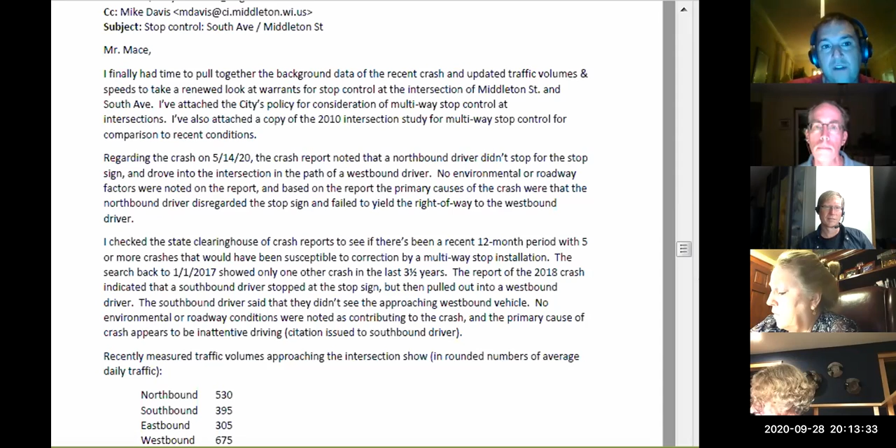Because I think the real thing for me is that you have a 25-mile-an-hour street there, and the blind spot was brought up. I have personally seen two cars get totaled at that intersection. And that's I guess the consequences you're talking about, but no car should get totaled at a 25-mile-an-hour residential street. The one car, it just happened a few months ago, they hit my neighbor's bird bath so hard the concrete top of it shot across his yard 10 feet. Just to give you an idea of what we're talking about for speeds in a 25 mile an hour.

And I think the other thing that's not measured is kind of the almost. I can't tell you how many times I've been in my backyard, my front yard, and I hear people honking because, as you say, you have to edge out to see around. And if there's a car there, it's even worse.

So I don't know what the perfect solution is if a stop isn't decided upon. But I'm at a point where I don't even like my kids playing in my front yard. If they are, I am sitting at the end of my driveway in a folding chair. And it's just insane. I'm not even exaggerating to tell you, I've been tailgated down that hill pulling into my driveway. I had somebody actually almost try to pass me in front of my house.

So I get that the Middleton police can put up the speedometer signs or whatever, but to me it's just a temporary fix. I don't see how that's going to help. And to me it's not a matter of if, but when is somebody going to get hurt. It's a real concern, I don't want to discount that. People do get hurt on roads all the time from bad driving.

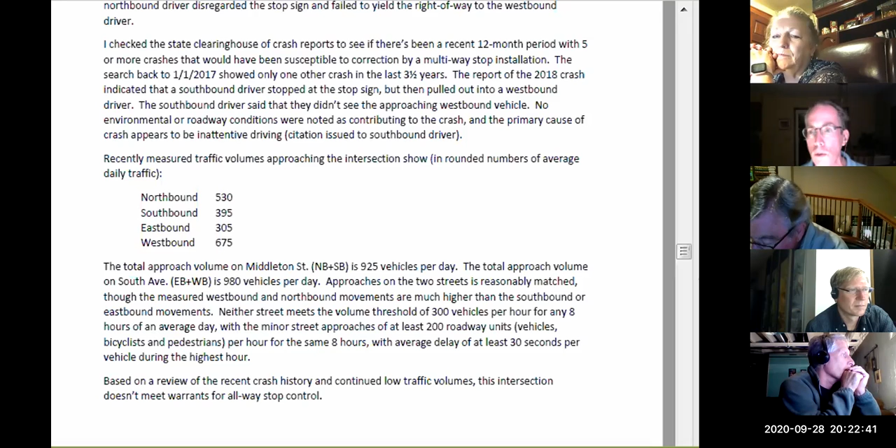If a stop sign's not the answer, then really what is? How do you get people to slow down? I know we've talked about speed bumps, for instance. What is the answer?

Speed bumps are traffic control devices in general. They can help mitigate what I'd call excessive speeding in our policy, which is more than 10 miles above the posted limit. So those going 35 and above, we tend to bring down on a percentage basis, but it's not the kind of silver bullet where folks going 29 suddenly start going 25. That we don't see. And they also have a relatively limited effect.

The more we build those things in series, like when you get out to North High Point Road and you'll see kind of 3 of them in a row, that tends to have a better, longer effect than just putting one someplace. Because as much as people grind their teeth and complain about slowing down, they'll make up for it someplace else. We've measured that too.

I think if it's decided against, what I'd like to see is an accurate average measurement of those coming down the hill. That would be more telling than the data we have here.

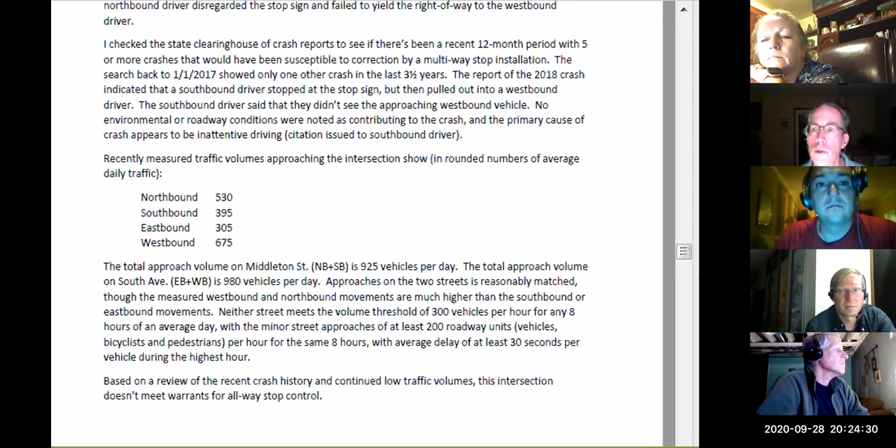Well, and that's the thing. Whatever spot we pick, there's a different speed someplace else. So what's the sweet spot? I think where we had people walking across the street or traffic rolling across at an intersection, that's where we're trying to measure that approach speed. But if there's a hill half a block away, does that translate into the intersection danger?

So maybe we're a little bit away from the hill because what we're really interested in is how fast people are approaching the intersection. But I guess that's where I'm at, the sidewalk side is on my side. So there's a house in between my driveway and that sidewalk, and there was no measurement in that area, which is really the problem.

That's the area I brought this whole thing forward because of. So if you measure it 3 blocks down the street, they've already rolled out at that point. God, I would love it if somebody would just hit their brake when they come down that hill. It would solve everything, but nobody does.

Right, we could remeasure speeds at a different place. We were trying to study this intersection, so we were trying to get the approaches to the intersection.

Sean, if I were to ask for some police to come and monitor for speeders, would you do that at the same time as counting, or would that skew it? Because if people see a cop, they behave, then the cop leaves, so that'd be counterproductive, I would think. Yeah, that's what I was wondering. I just wanted to know what comes first.

Yeah, we try not to measure stuff while speed boards are up, because frankly, I don't know that people mitigate or moderate their speed much because of speed display boards, but just in case they do, we try not to get data from that.

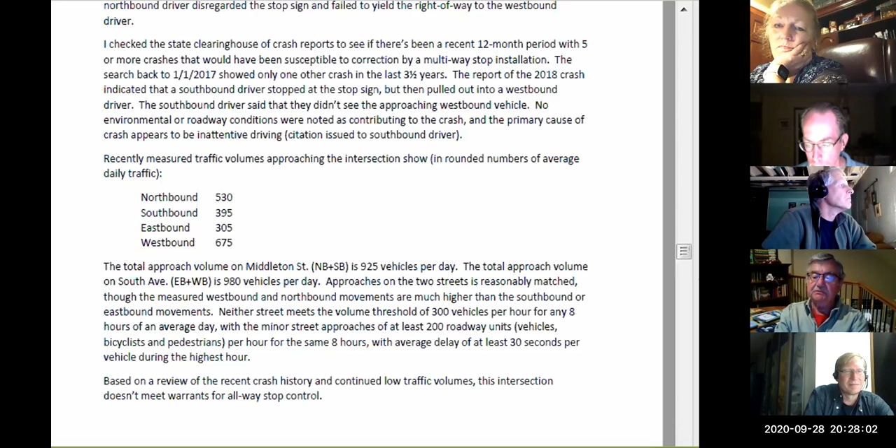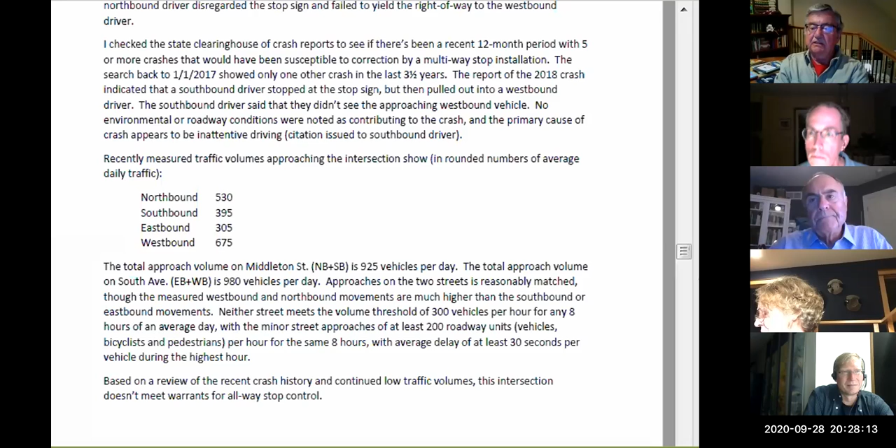Hearing none, those in favor of the motion signify by saying aye. Aye. Those opposed, nay. So that's Bob and Carl opposed? Bob and Carl voted nay. So the motion carries, 4-2 I think.

We then could proceed to see if we can maybe get some police monitoring somehow near the bottom of that hill, just to see how fast the traffic is going down the hill. Before you put out a speed counter, correct, Sean? I think police are going to be a better first tool. All right, I will reach out to them and ask them to do something, and then we'll see.

Okay, all right. Thank you, Kathy. Thank you, Kathy, and thank you, Corey.

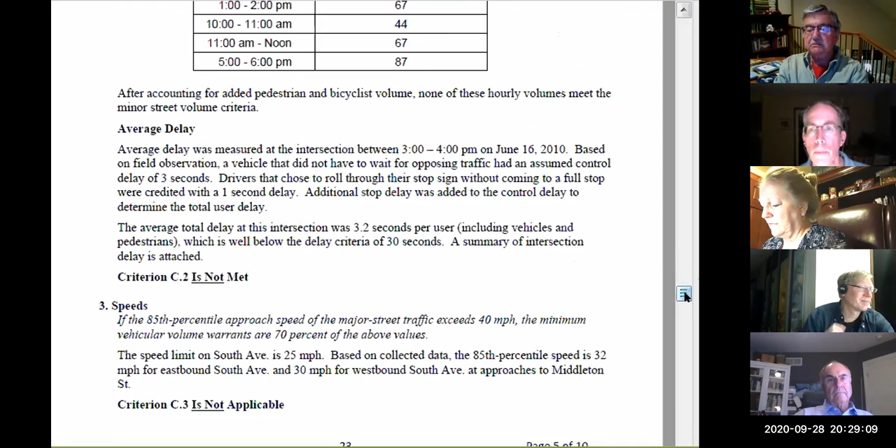All right, next agenda item. We just have two things left, and they're both related. Let me get through some of this here first. All right, Gary Huth is with us tonight. He's our Assistant Director of Public Works, Assistant City Engineer. He has been shepherding the Pleasant View Road reconstruction project.

We're up to the point finally where we need to get the state to commit to actually funding the construction, so that's going to be our state municipal agreement. Everything federal funding wise is tied to that. Secondarily, but in conjunction with that, because it's a multi-jurisdictional project from a local perspective, we need to reach an agreement with the city of Madison for them to reimburse to the city of Middleton their share of the first phase of project costs, so that when we're building this, we're sort of running a three-party agreement with two agreements, each of which is two-party, if that makes sense.

So the first and more important of the two is getting a state municipal agreement online, but we don't want to do that without there being a City of Madison, City of Middleton agreement in place.

Sean, just for our reference here, what is the committee's role on these? Just simply to make a recommendation to the council to enter into these agreements? That would be our function here? It is, right. So we'll recommend to the Finance Committee and Common Council entering into these agreements. And Gary has suggested contingent upon satisfaction of the city attorney, of course.

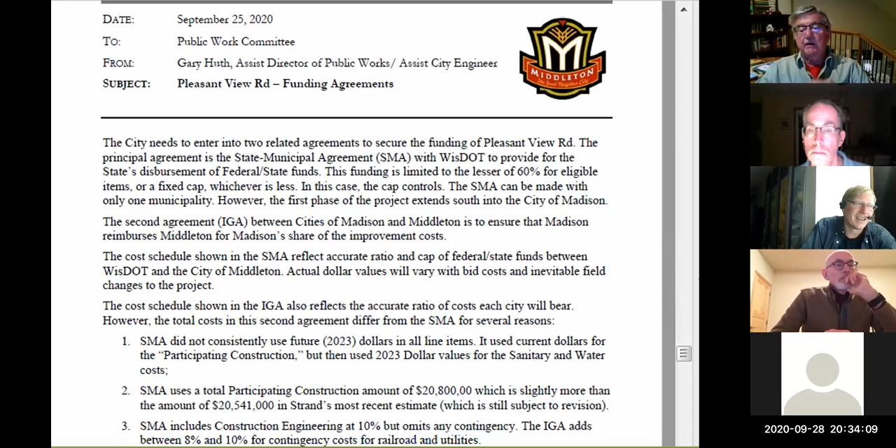And they're pretty rigid about that, but I don't have a specific drop dead date for this. I would think if we got this done by sometime in October, I think we'd be all right. But sooner in October is better. Sure.

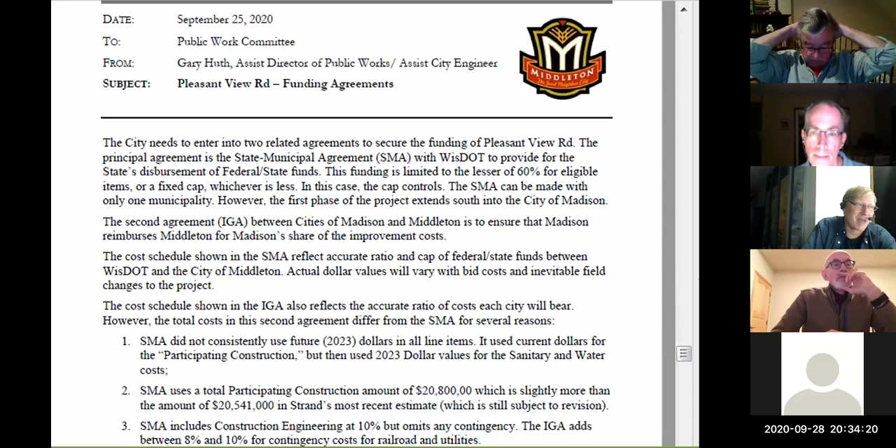Gary, when do the negotiations start with the intergovernmental agreement with Madison? Do you think you can get them and us in agreement by mid-October? I do. Madison staff actually drafted this.

It's a format they've used in the past, and staff is in agreement with some edits I suggested. I also added an exhibit to help identify how the cost split was arrived at. It could have been built into the agreement, but so as not to put a wrinkle in Madison's format, I thought it would work just as well as an exhibit.

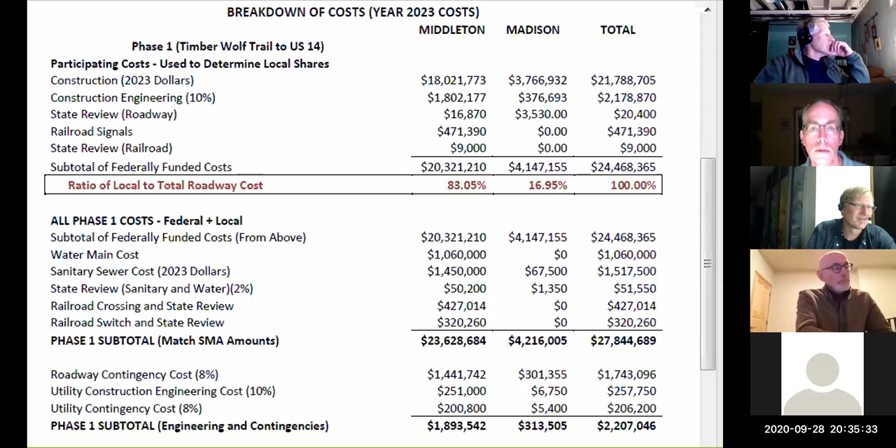It probably would be helpful if Madison could put in an extra sentence making reference to the exhibit. Did he ever get something to you, Sean? I didn't, but I'm confident they will. I didn't know if they had it ready for tonight. Nope, they didn't. He was going to bring it to the council October 3rd, or October 1st, very early in October, at Madison's council meeting.

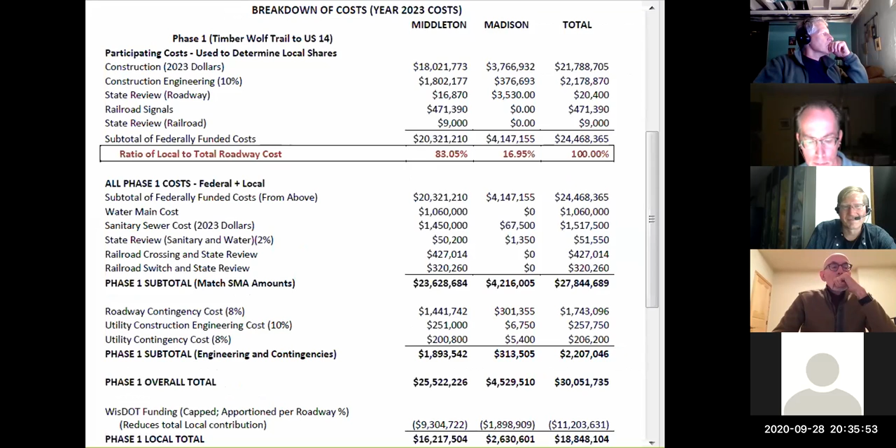But the latest I heard from him is that he was hopeful he would be able to bring the Middleton signed version of the agreement to the council for their approval. I'm not sure why that would be needed. If they approve it in concept and don't sign until we sign, that should work, but I don't know exactly how they do things there.

All right, so Robert, if you amended your motion to say recommend execution of these agreements rather than approval? Actually, I'm steering myself the other way. I trust that Madison and Middleton will get signed, and maybe if we don't wait for execution, we grease the wheels a little to get both of these moving forward.

So my motion would include that we move forward with this upon approval of the intergovernmental agreement with the city of Madison. I think approval is all we really need today. And the city attorney will have something to say about that too, since it's still subject to city attorney approval. So if the city attorney says it absolutely needs to be execution, then we're back to that.